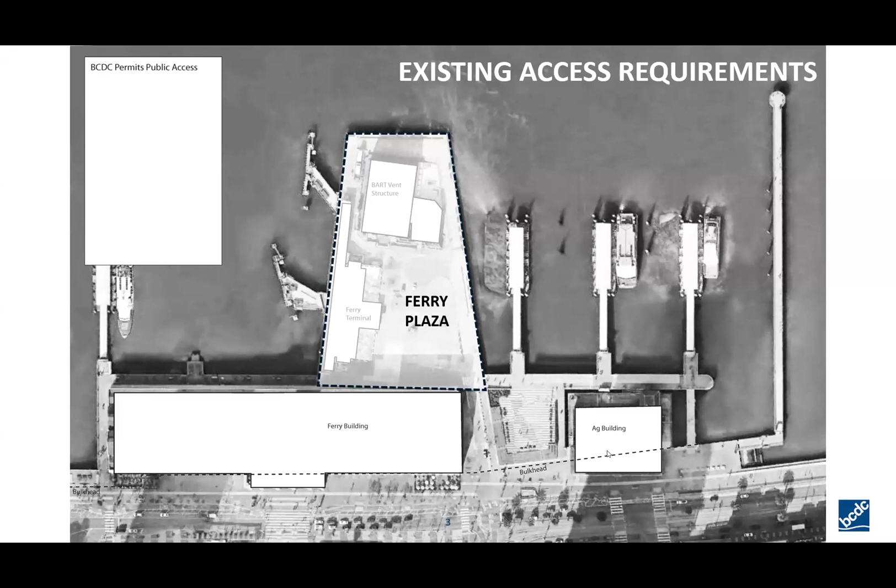The 1967 permit required public access on the perimeter of the platform, not required for ferry operations. The area wasn't specified in a permit exhibit, but was described in the text of the permit special conditions as the perimeter of portions of the platforms that are not required for ferry port operating purposes and that do not interfere with berthing ceremonial ships, that in no case shall be less than 35 feet in width from the edge of the platform. So this depiction is based on that description.

Permit 1973-010 authorized both the restaurant and the Golden Gate Ferry Terminal. The permit required the entire plaza east of the easterly wall of the Ferry Building, as extended south across the BART platform, except for those areas occupied by the ferry terminal or required for access to the restaurant, to be used exclusively for public access. It also required the second floor public lookout at the ferry terminal as public access.

The requirement for the Ferry Plaza was later transferred to the 2000 Ferry Building Rehabilitation Permit. So you'll see that cutout shape here.

Permit 1990-008 was for a number of roadway improvements along the Embarcadero and for the Muni Metro. It required the dedication of public access area for the Embarcadero Promenade between Broadway and Harrison Street. Amendment 6, approved in 2007, authorized the use of a portion of the dedicated public access area for outdoor dining. These include the 30-foot wide areas shown on either side of the building's entry portico, which have come to be called the cafe or market zones.

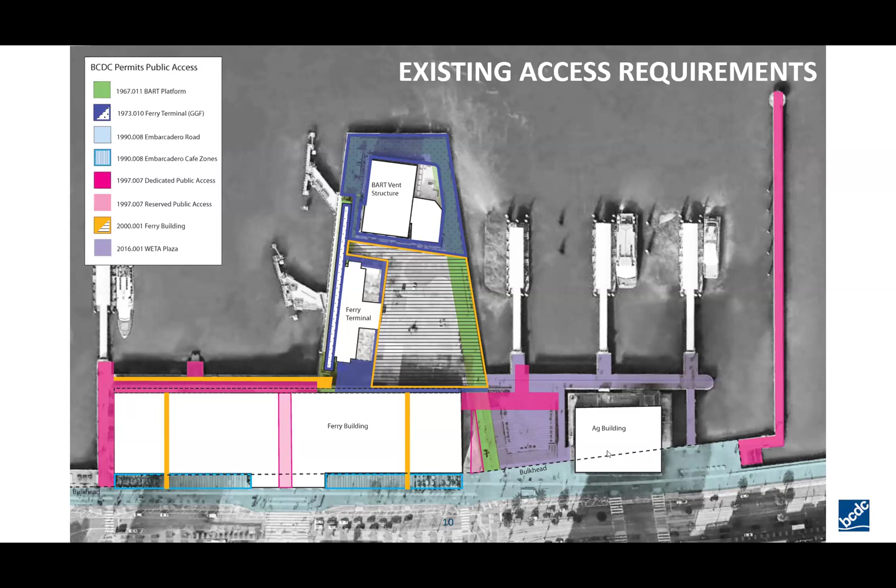Permit 2016-001 authorized new gates for the WETA San Francisco Bay Ferry south of the Ferry Plaza and included public access conditions for the WETA Plaza, also called the Embarcadero Plaza, and a bayside promenade connecting the new ferry gates. These areas are outside of the scope of the current project, but we're including this information so that you're aware of these closely connected uses immediately adjoining the project site.

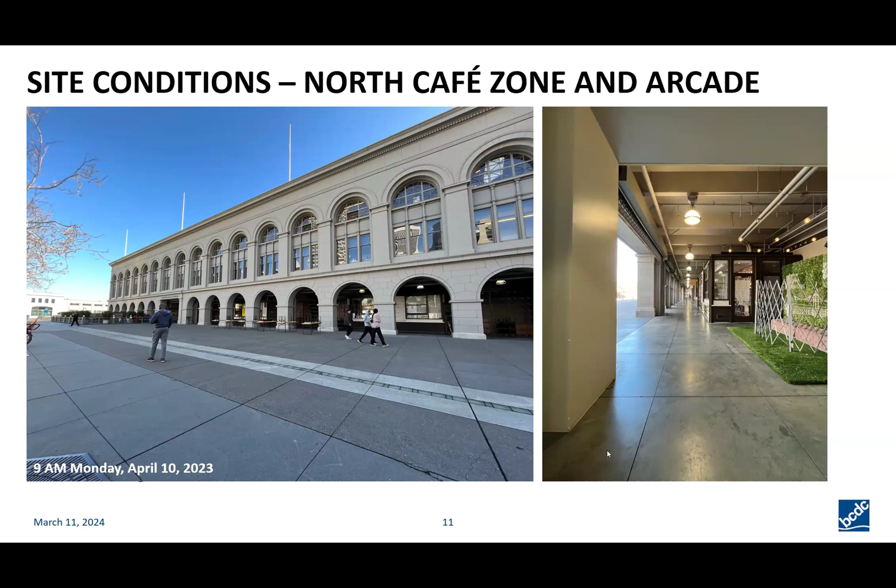And here's some views of the Ferry Plaza. This one on the top right is a view from the Gandhi statue facing towards the south side of the building. Just under that is a view of the space on the north side of the plaza next to the Golden Gate Ferry Terminal, facing east toward the restaurant structure.

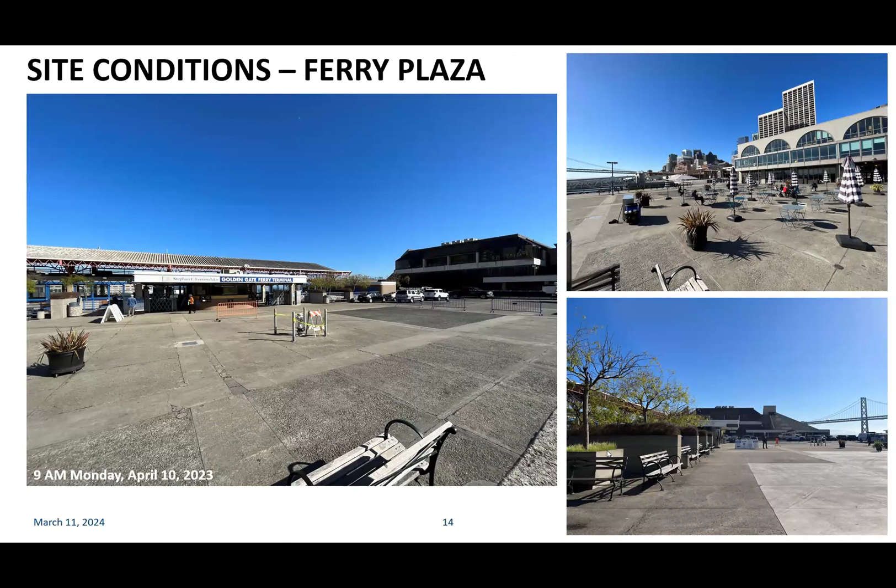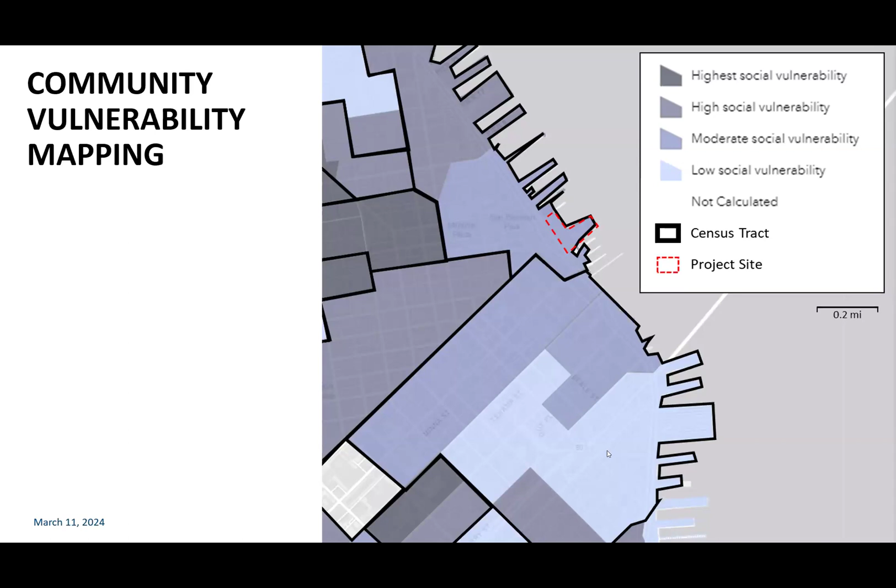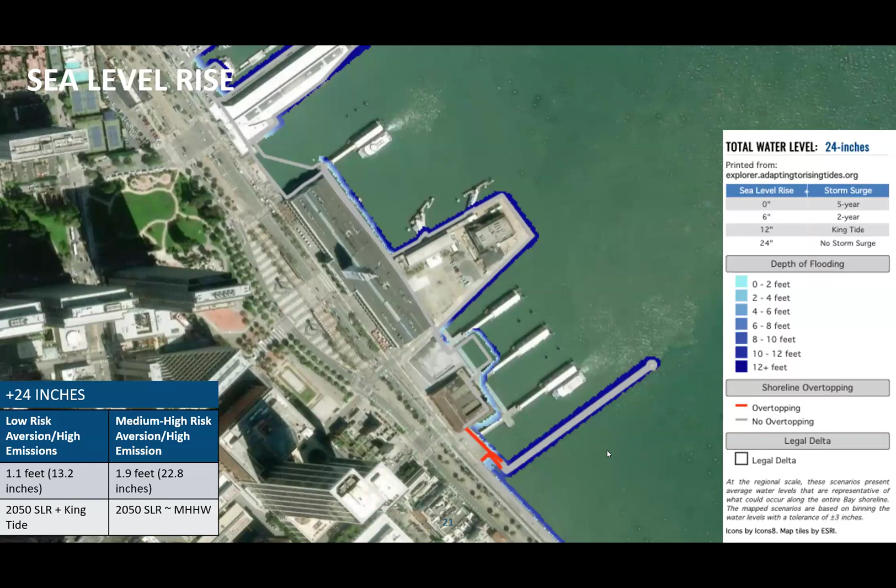And then regarding potential sea level rise, using current site elevations, this map shows what 24 inches of sea level rise would look like if the site remained unchanged. Using the Ocean Protection Council's 2018 sea level rise guidance, 24 inches of sea level rise is equivalent to the mean higher high water level under the medium to high risk aversion, high emission scenario at mid-century. So at this level, there's potential for flooding during a 100-year storm event.

Just a reminder, following this agenda item, the port will be providing a briefing on the San Francisco Waterfront Coastal Flood Study, which should provide some more context on the port's area-wide adaptation efforts.

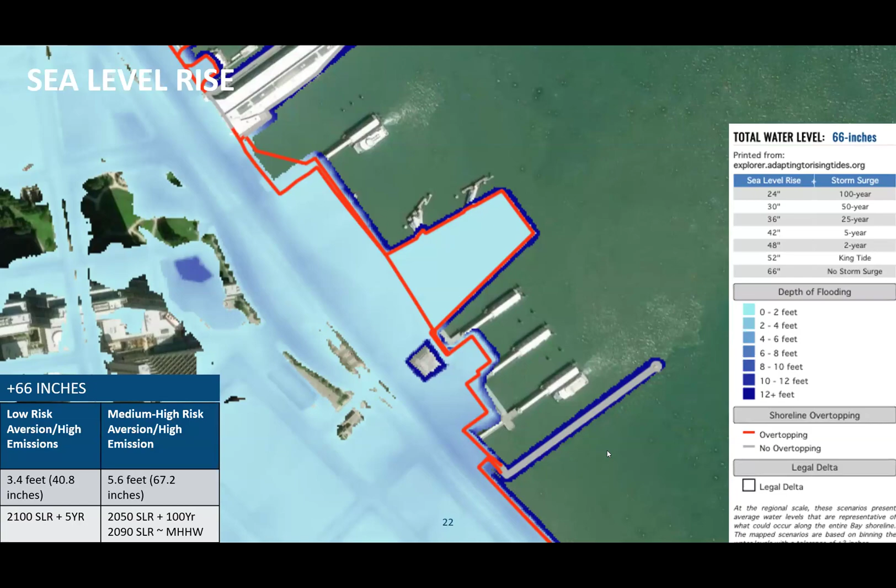All right, and then here's just a quick refresher on some of the major topics of discussion from the previous review on April 10th of last year. Note that the project description has changed since then, most notably in the removal of the Bayfront Kitchens alterations to the east side of the building and the Ferry Plaza kiosk from the proposal.

In their review, the boards were concerned that public spaces and amenities would be removed, but that the demand for them might not be accommodated in the new design. And we're interested in seeing metrics for amenities such as seating in order to compare existing and proposed conditions.

It was noted that the ferry building and surrounding public access areas are an equalizing space for tourists and local residents alike, and they were concerned that the public nature of the site would be reduced.

The boards discussed how the gravitas of civic architecture contributes to the public character of the building and plaza, and how more substantial materials could ground the public areas of the site, while more playful, lighter materials could help define the private commercial areas. The boards also discussed improving the continuity of materials and design between the proposed project and neighboring civic sites such as the WETA Plaza.

Members noted the importance of the transportation program that the plaza supports, and that the space plays a significant role in making connections to all modes of transit. Members expressed concerns that with the transition from public transportation hub to more private uses, they also suggested considering the pathways that draw people to the plaza and different destinations of the site, and finding a balance in wayfinding between using the building as a landmark, using design elements and draws, and appropriate signage.

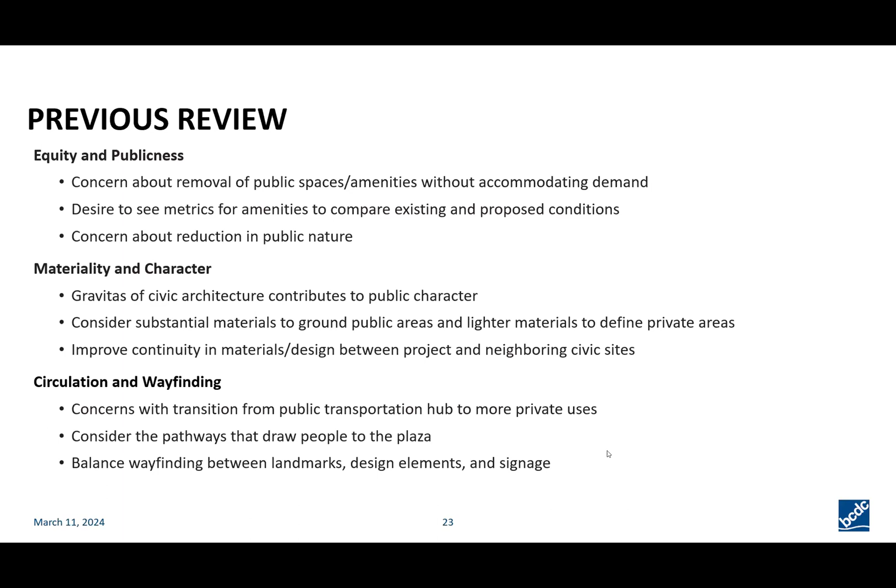All right, before we pass this over to the port staff, I'd like to quickly summarize the questions in the staff report that we'd like the board to consider in your review. So first, please consider how this project meets the public access objectives provided in BCDC's public access design guidelines.

Staff has also identified some specific questions we'd like to ask the board about the design at this stage. These are: 1, do the proposed alterations reflect the civic nature of the ferry building and potential demands for public uses of the site? Is the civic nature of the building and surrounding public spaces supported by the materiality and design of the proposed project? 2, do the proposed alterations sufficiently maintain or enhance circulation and connectivity to and along the shoreline?

3, do the proposed activation areas along the building frontages, collectively and individually, promote an inviting and usable public access environment at the ferry building and allow for adequate public circulation to site entrances and destinations? 4, in particular, would the proposal to place a cafe, market zone, and public seating area in the South Promenade activate and improve the quality of the public access experience, in balance with addressing the public access and circulation needs of the project area? And then 5, do the proposed elements support a cohesive, legible, and inviting public access program?

So first, I want to check to see if the board has any clarifying questions for me on anything presented in this introduction.

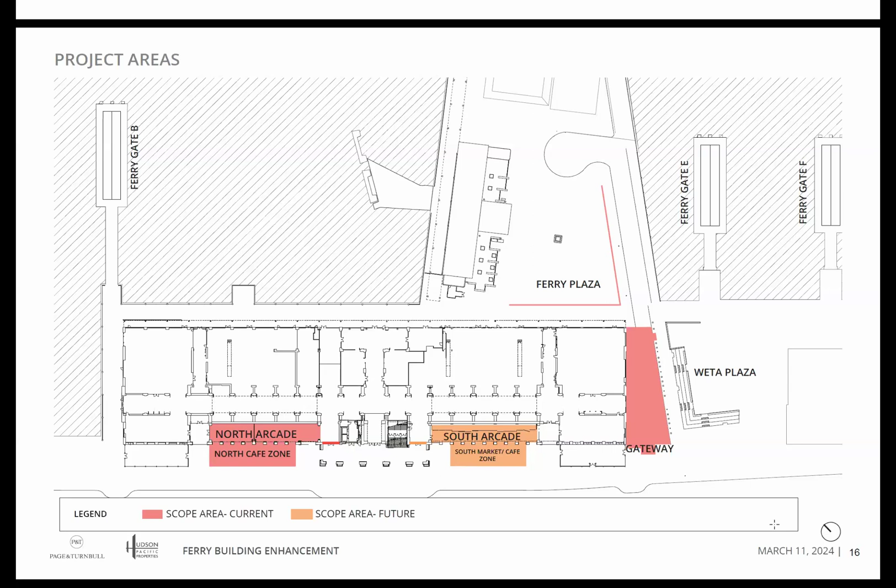Here you can see a quick preview of what we're looking at in the front arcades. This is the North Arcade. We've got merchants—and to be clear, many of our merchants are both restaurants and food purveyors for takeaway and prepared foods—fully occupying those front arcades and spilling out open onto the cafe zone.

It's important to note, as you can see in the rendering, that in 2003 roll-down grill gates were put in as part of that project. We went back to that same location and looked at how those are installed behind and separate from the building arcade, and looked at how we can create a movable glass panel system that would be open during the regular daytime when the building is functioning well, and closed when it's cold, windy, or into the nighttime. Today, those roll-down arcades you saw earlier still don't do much about wind or temperature into the evening, and that's an important thing to notice.

The cafe zone is lively, projecting life onto the Embarcadero frontage, including dining zones, seating, and public seating along the front. Over towards the portico, there's also public non-dedicated seating added there, in addition to the canopy.

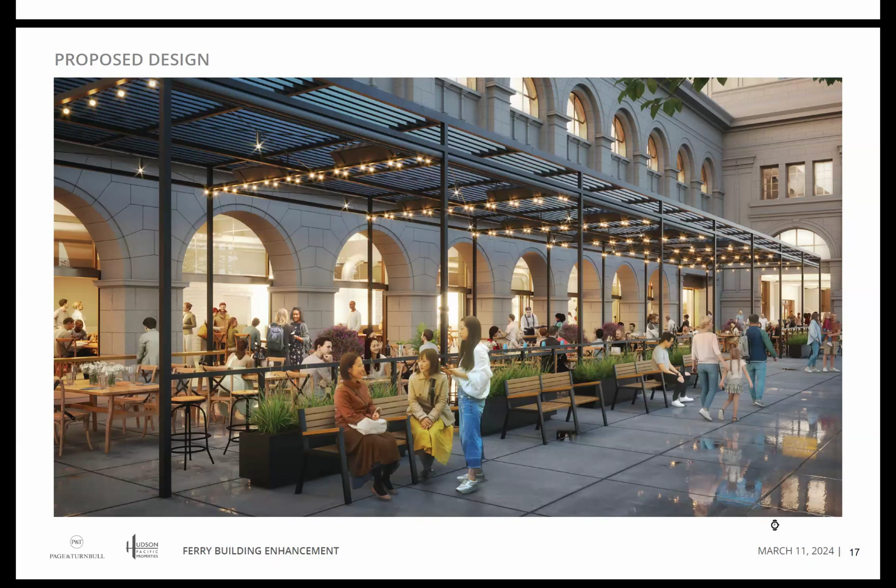We think the wedge—or the gateway, as we're starting to call it more publicly—is a huge opportunity. We now have a great neighbor in the WETA Plaza, and the building itself, with the restoration complete, is looking beautiful. But in between, as you'll see, there's a real question of what to have. This will give us a chance to better frame the existing driveway, with a cornerstone that mimics the WETA Plaza and a marquee sign announcing the Ferry Plaza, along with individual gates and directions for those gates down below. We think this can be a really special place. We're also going to introduce a new cafe zone towards the rear left portion, and a new public seating area that will benefit from the warmth of being on the southern side of the building.

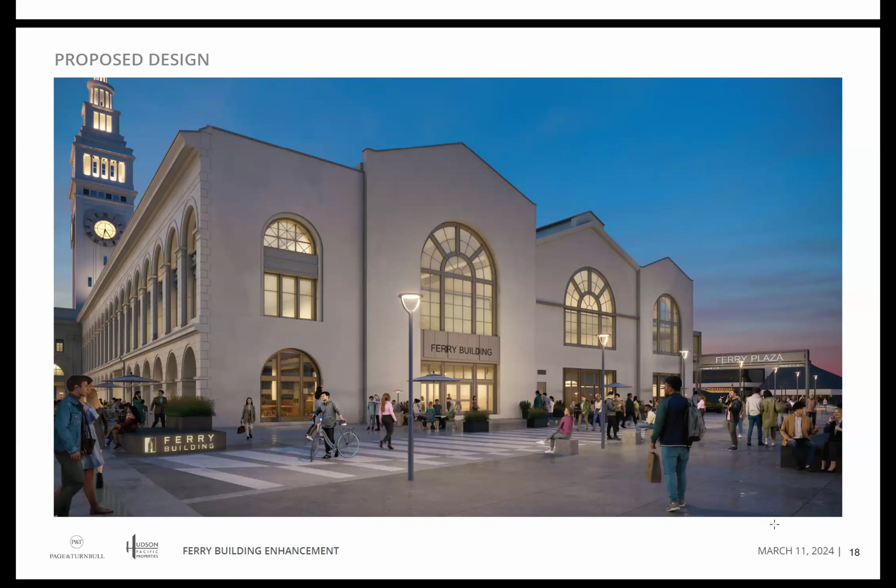Finally, and this is really quite simple, we need great lighting out on the plaza. The only change here is having a series of lights, which we'll talk more about, that make this a place everyone would like to spend time in well into the evening.

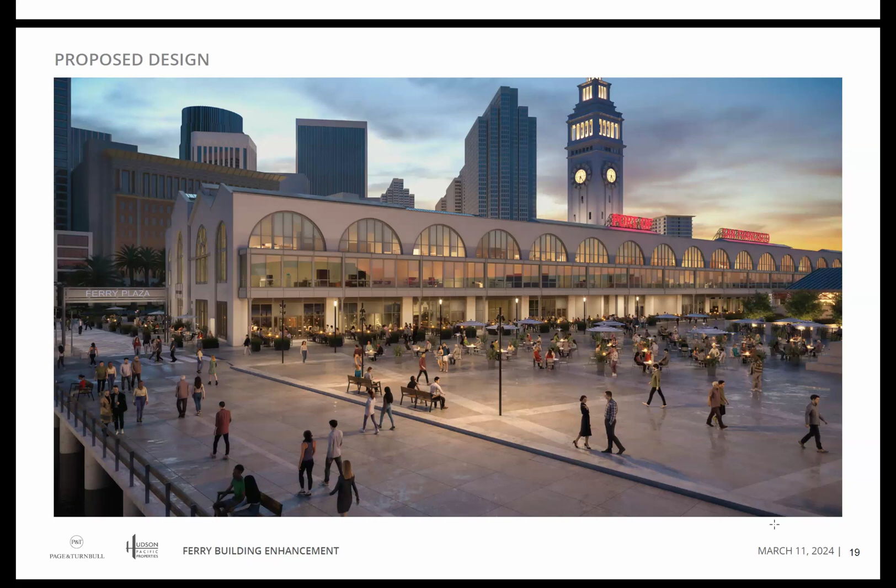Thank you very much, Carl, for a great overview of the project. I'm Lada Kocharovsky, an architect and principal with Page & Turnbull. I was part of the preservation design team in 2003 when the renovation of this building brought it to become the new destination in the city. I'm also part of the same firm that wrote the design guidelines in 1978 that defined the approach to rehabilitation and adaptive reuse of the ferry building. I can assure you that in the proposed design, there's nothing we see that contradicts these design guidelines.

As architects, our goal is to meet the client's needs, and we're faced with a million questions and problems. As preservation architects, what's paramount to us is making sure that given the magnitude of significance this building has within the context of San Francisco and nationwide, we bring design interventions that are compatible and sympathetic to the fabric of the existing building. So as Carl outlined the arcade proposal and the cafe zone, our focus is to bring warmth, light, and consistency of design along the west facade by integrating new restaurant uses that will occupy the arcade. But the character of the building is not changing at all.

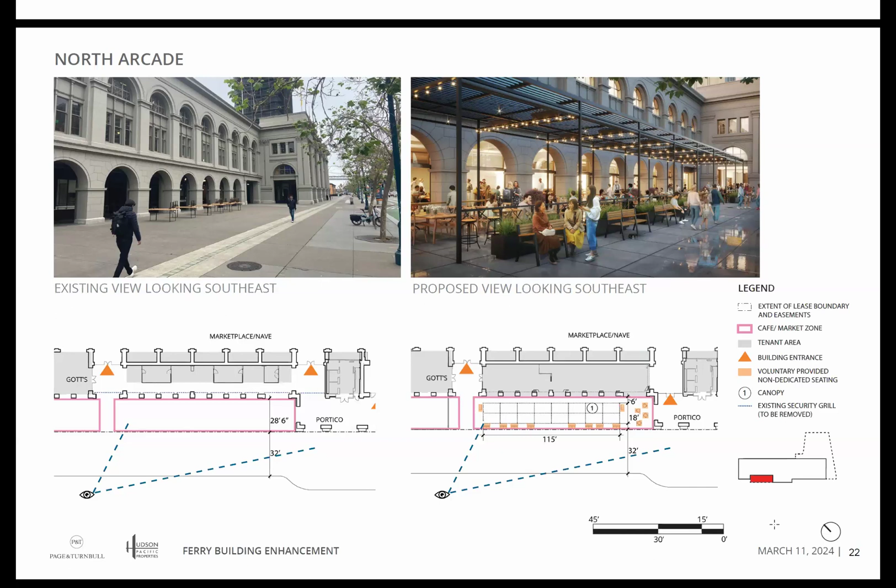The outdoor area with the canopies frames the space for outdoor seating while remaining completely flexible. We have an exhibit here to help orient you. These images side by side show the character of the arcade and how it's used by visitors—on the left and right, how we envision it being used with a variety of visitors and public uses. The benches and seating along the edges of the canopies are open to the public and won't prevent anyone from using the building, just as people engage with the pedestrian traffic along the Embarcadero.

This plan, though it may be a little faint, shows how the seating is planned within the canopies that restaurants will use. But on a market day, we envision it being pulled back, since it's completely flexible. The barriers can easily move to the back to allow the area to be used by the farmers market, and these are the tent layouts we contemplated that could easily go there.

So that is how we demonstrate flexibility that comes along with the proposed design. And speaking of design guidelines, the big focus of preservation design guidelines is flexibility and reversibility. What we're proposing with the canopy structures is completely reversible. They're light, they're airy, and they serve to organize the space for outdoor seating and engaging visitors.

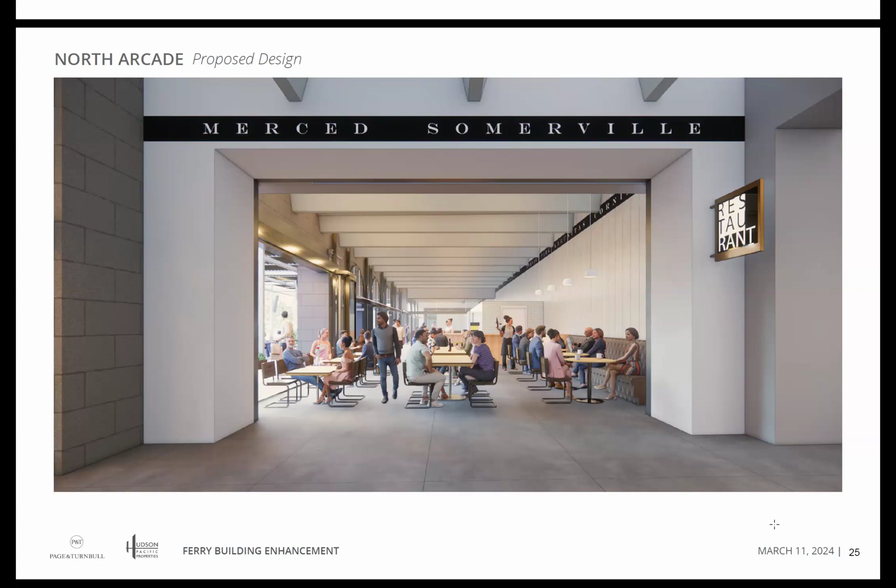Here we're looking at the view of the arcade from the nave, and it shows that the focus of the design is to maintain the transparency of the arcade. There are no barriers that we're planning. So anybody who sees the arcade in the images that Carl shared before, with the view of the length of the arcade, that view will remain unobstructed with future interventions. This is a good example of how you read the arcades now, and this is how you will continue to read them once the project takes place.

We wanted to show a different angle, since there were previous questions about how and where the new glazing systems will be installed. The roll-up gates that you see right now, which we showed in previous slides, mark exactly the location where we're going to install the new glazing systems. Essentially, the interventions that took place in 2003, which were meant to be reversible, are being replaced with a new system that allows visitors to be comfortable inside the building.

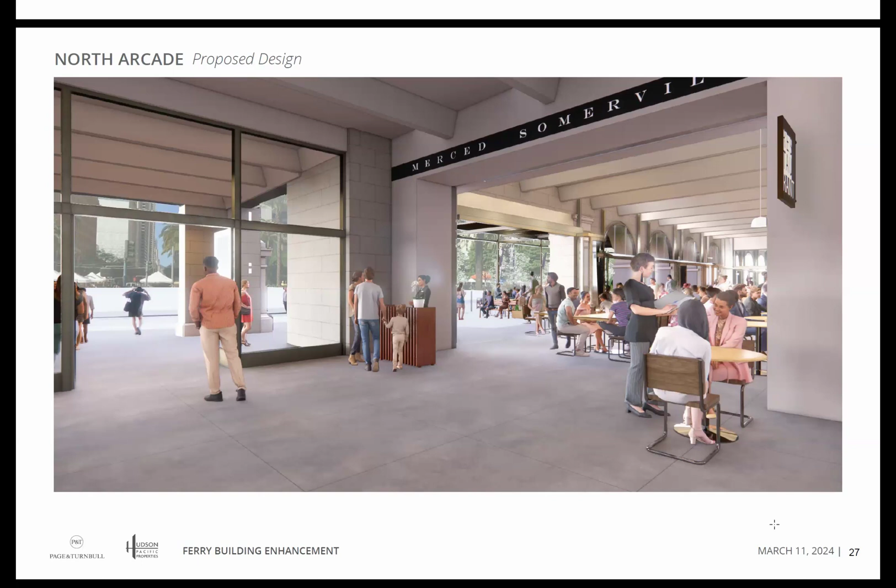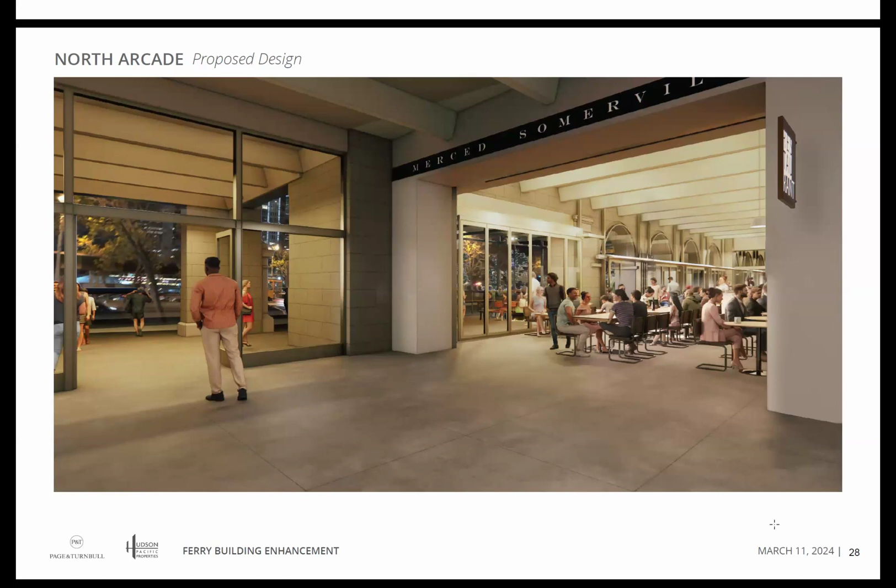And this is the view at night. On days when the weather is not friendly, this is how people are going to be enjoying being inside those spaces. The systems are transparent, and they will look inviting and warm from both the outside and the inside. Side-by-side views here: on the left, daytime, and on the right, nighttime, of the same space.

With that, I would like to ask Sarah Kuehl to speak about the exterior improvements to the plaza.

Thanks so much, it's great to be back and to show you all some response to your design feedback from last time. For the record, my name is Sarah Kuehl, and I have a firm called Einwiller Kuehl Landscape Architecture. When we started working on this project, it's obviously a place of a lot of gravitas and seriousness.

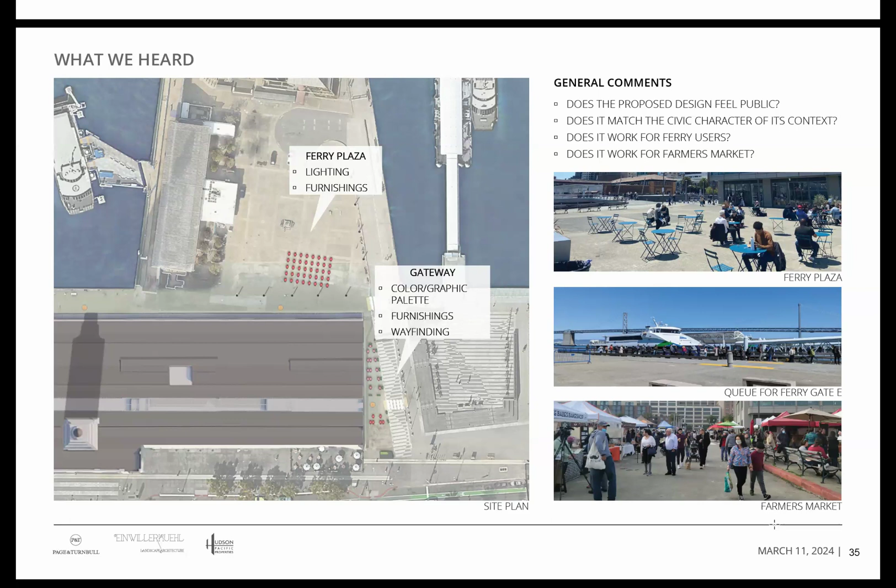Those were terrific comments, and we continued that conversation over the last six months to a year with people who use the space every day, getting into specific things around operations. How does this place really work? There's a built architecture, but there's also a programming and operations side, which we attended to in our thinking.

When you arrive here today, particularly at the south end of the building, it's a bit indeterminate. It's unclear exactly where you're supposed to walk, unclear exactly how to enter, and not totally clear when you get to the Ferry Plaza. Those are some of the things we started to solve with our interventions.

Our interventions are quite a bit scaled back from the last time we were here, and we're really building on what's come before us much more directly. For example, we've added a cornerstone seating element that's almost a piece of a glacier that cleaved off from the Weta Plaza. We've also added the gateway sign and kept that to announce you entering Ferry Plaza.

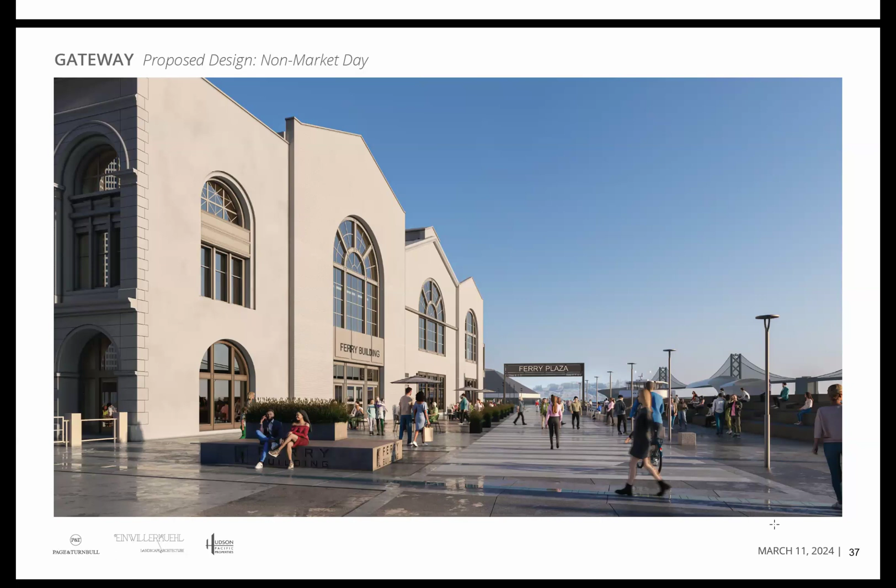We have activation and spill out from the building on the eastern half of the wedge. All of those things together begin to suggest this is really a pedestrian place and give you cues for how to move about, enhanced with some ground markings.

The actual materials we're using really want to feel like they're part of things that are already here. So the Weta Plaza granite, the proportion of the seating, the way we're building that cornerstone is going to relate very directly to the materials used at Weta Plaza. The Ferry Plaza signage takes a lot of cues from a traditional gate to a ferry, but one you'll be able to see clearly from Embarcadero.

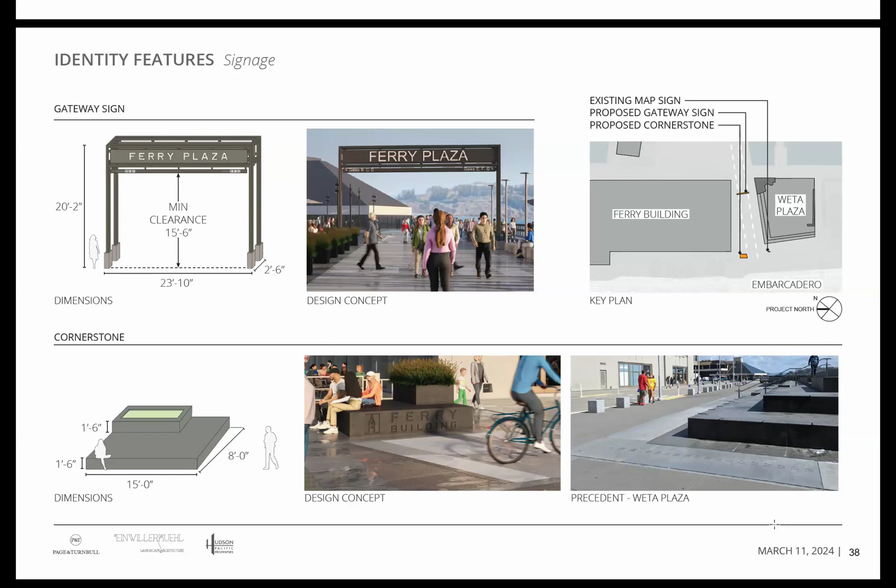When you see those things laid out on the plan, they're working together with elements that are already here. You can see the seating spilling out and those two identity elements. You can also see a mosaic medallion and some ground markings further helping to define the space, but we're being careful not to add fixed elements that get in the way of what FoodWise is doing out here, allowing flexibility for setting up the farmers market.

The idea for the medallions came from two things. One, there's a tradition inside the ferry building of mosaics that relate to the market hall—there's also one on the mezzanine. There's also a sort of wayfinding medallion at a gate to a ferry. We wanted to use these medallions at each entrance to the ferry building to cue that this was a place of public entry.

So as you move between outdoor seating and other things, this tells you you're really supposed to enter here. It seemed like an opportunity to tell a story about the waterfront, either animals that are part of our waterfront or perhaps boats, and we would work with an artist on the final design of the medallions.

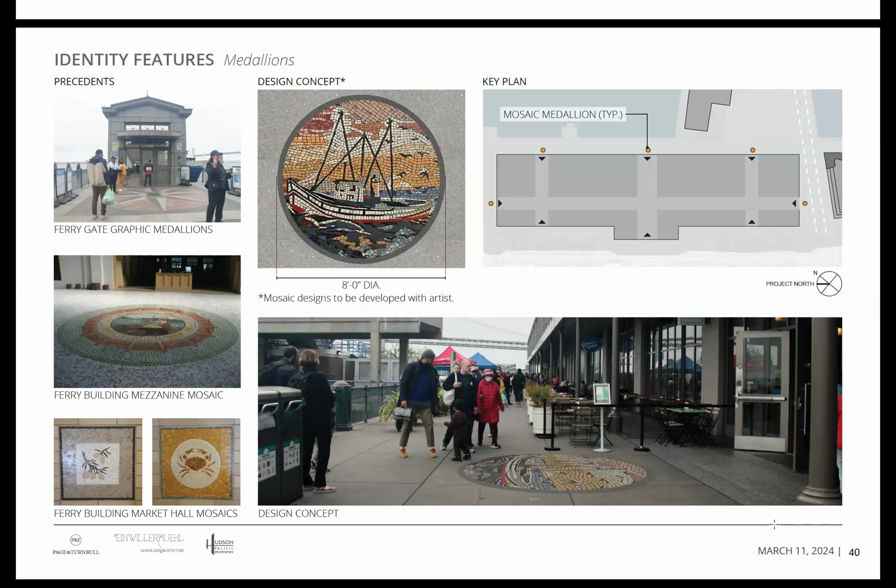Our design proposal is very small. We have a series of lights that mark the edge, kind of the way lights can mark the edge of a roadway to clarify circulation, and additional seating being added just to expand the use in that area during lunchtimes.

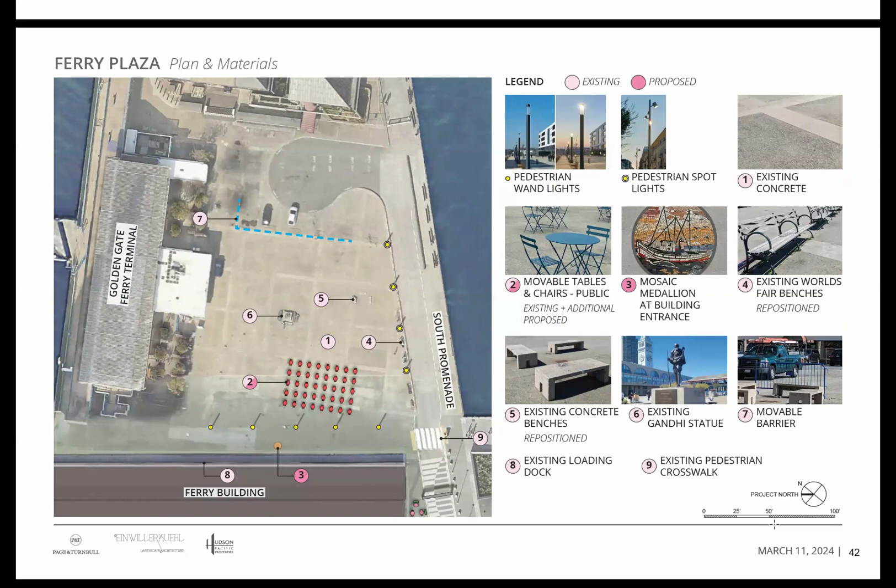So I'm available to answer questions, and with that, I'll hand it back to Carl.

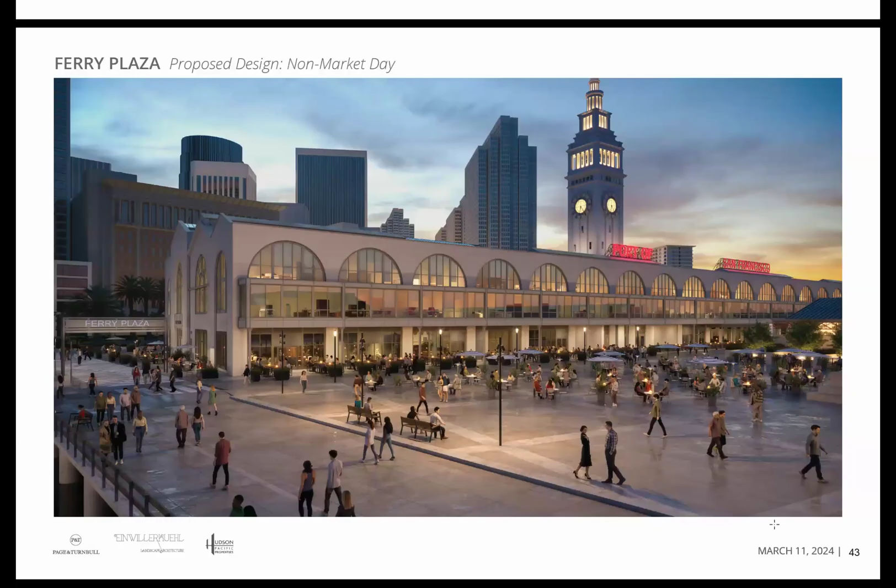So my question is, when you move the railings to make room for the tents, in the render they look like they're part of the architecture, which is good. But at the same time you need something flexible—what is that really going to be? And in terms of serving alcohol, does that height of barrier work, or might something taller appear?

Just a clarification on the seating: the area is open from 6 a.m. to 10 p.m., same as the ferry building. The movable exterior seating gets packed up every night—unless there are events, we have porters who move that seating in and out and stack it as necessary. The new additional exterior seating that's movable would have that same management. Okay, thank you.

Could someone explain how the arcades were used in the original ferry building design, how people used them? It seems like that's not necessarily what they're being used for now. Can you also explain what the proposed use is, and how it compares to the current or previous use?

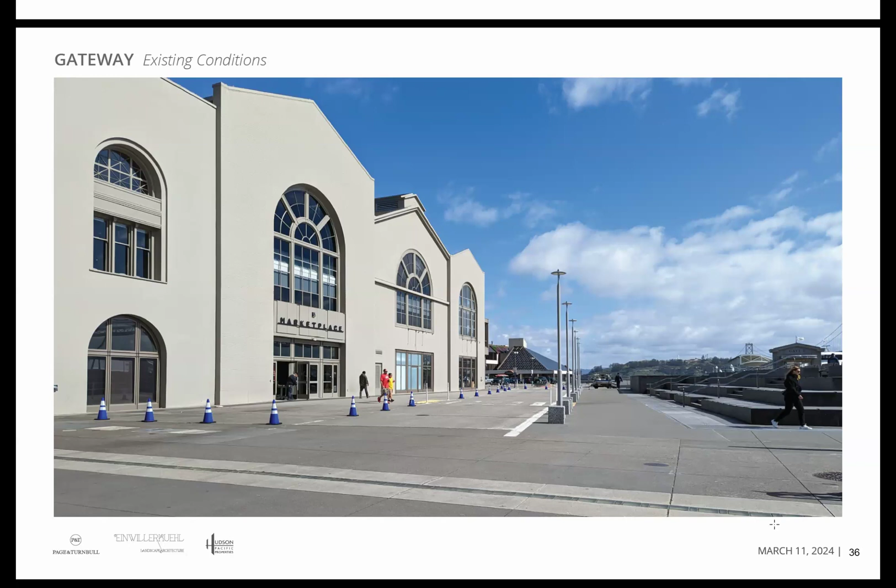My last question, and there may be others as I continue listening to other people: I do not see any back of house space indicated in your plans. You're speaking about transparency and lightness, a light touch, etc. But refrigeration, food storage, and back of house activities have to occur somewhere. Would you need to take space from the building's inside-facing stores in order to accommodate that?

I anticipate we've gotten this question before. To be clear, I think any chef would love much more space and more back of house, and space in the Ferry Building is dear. So part of it is working with a restaurateur who can fit into these concepts designed by Studio KDA, and sometimes that means a more limited menu—someone very specific. That said, it also means this will probably work better for a newer, entrepreneurial tenant who has the opportunity to focus on four great things rather than a long menu.

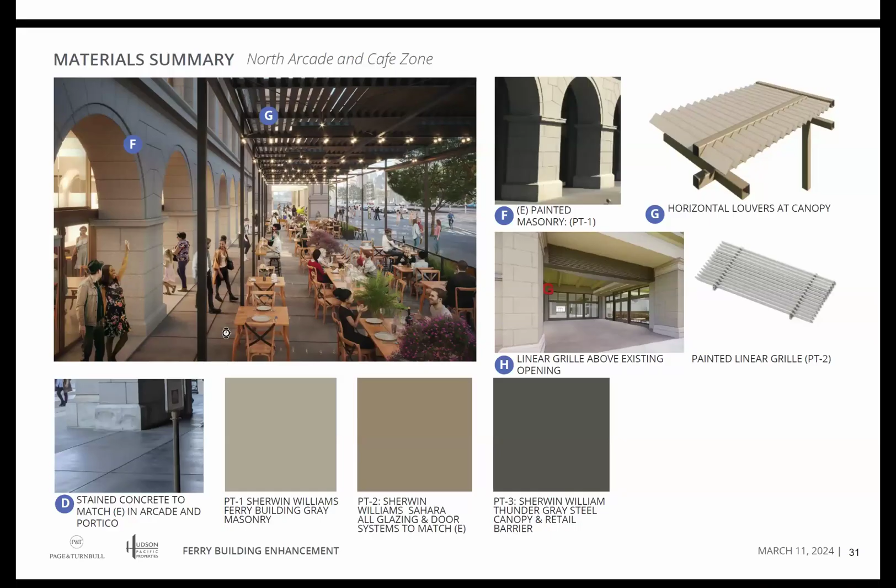Yes, so the layout of the Saturday market has been coordinated with Foodwise. There are some occasions where you can have double depth for your tent spaces, so vendors that need a bit more space to operate will be able to have that space. The first thing we did when we last left you was sit with the Foodwise team to come up with something that worked.

And just for everybody else's edification, we've looked at a variety of ways to try to provide heat and light to this space. Most of those ways were more impactful to Foodwise than what we're presenting today.

As it relates to the glass line and circulation, the way this is designed conceptually is to have those glass walls fold behind the column so that they're not perceived from the public. So you do get that airiness that I think we all want to protect and see. That is the hope and intent of the design as this concept continues to evolve.

But there's going to be a rail at the top that allows it to accordion behind that column line. It won't sit proud of that column at all—it'll be inset into the arcades. So it does provide that opportunity for light, airiness, and some circulation.

To be honest with you, based on your question about that circulation area inside the space to give that appearance, a lot of the table layout will happen as we identify a tenant and how many seats they want and how it's going to work for them. What we're showing you today is a sample layout. I would imagine that just from a service standpoint, they're going to want a bit more space to operate between those two points, so I do think you're going to get a bit of walkway on the interior space that you're not perceiving today.

And it'll be subject to fire code as well. So I think we're committing very clearly to the opening in between the two spaces that you can see right here, and that will line up to exiting and all sorts of rules.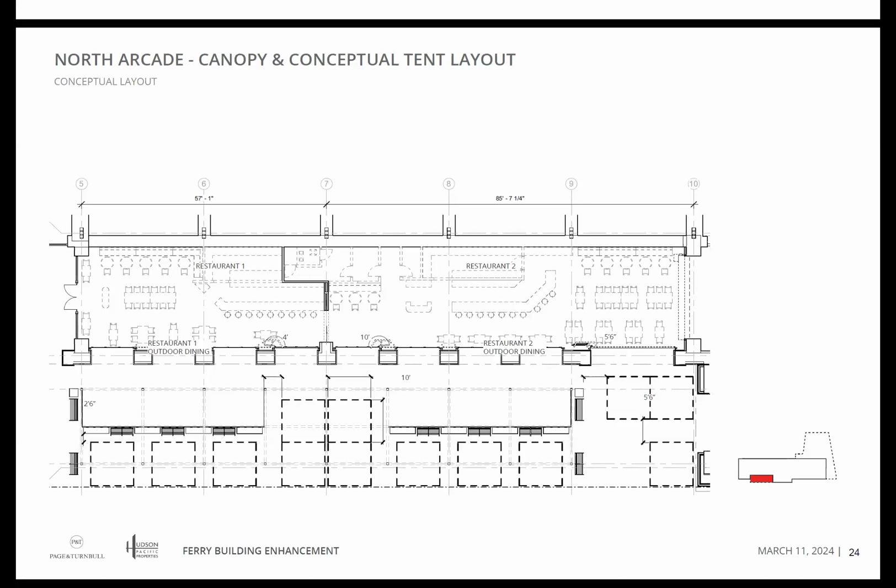So this is Ashley from BCDC. We did receive a number of public comment letters regarding the ferry building item, so I'll summarize those. We received these letters prior to 10 a.m. this morning, and they have been forwarded to the design review board.

And the Telegraph Hill Dwellers expressed concern over the proposed project. The letter summarized the restoration design guidelines and identified the impairments of thousands of square feet of public access through privatization, material impacts to the historic architecture, inconsistency with public access policies, and the transformation of the ferry building from public marketplace into a restaurant entertainment destination as their points of concern.

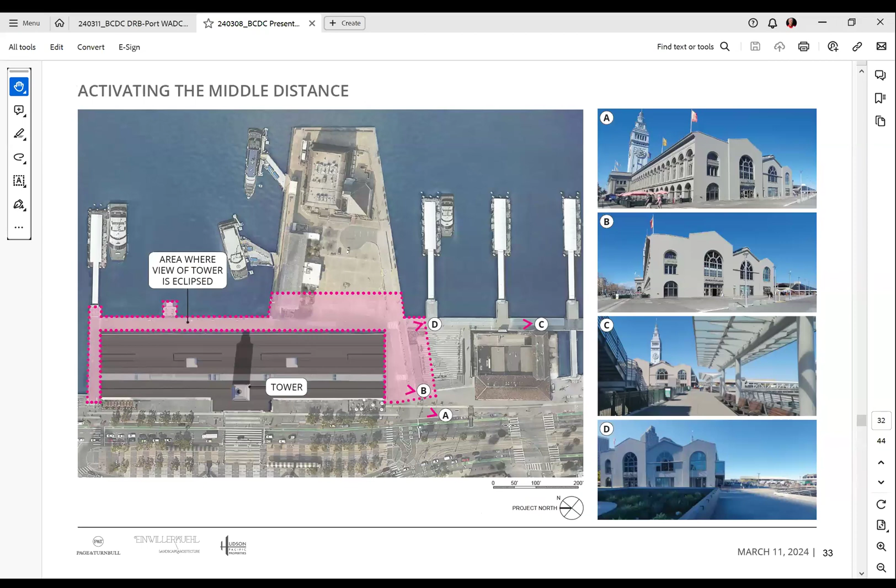I'll be quick. Yeah, it's a beautiful building. I feel a little out of my depth here as an engineer and not a designer in the sense that we're talking about here. I'm concerned about the conflict between some comments about wanting to keep the arcades open space, to maintain public open space, and the desire to activate the space and change the use. I've been thinking, and I can't think of a way to mediate that. I think other board members had great comments on how to do that, so I'll just give my time to the other board members.

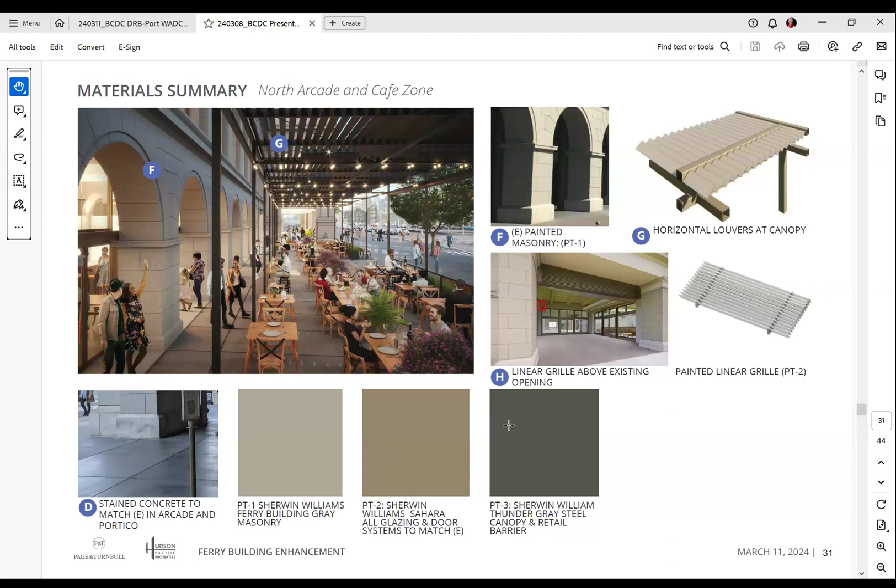Okay, thank you. Well, for me, I'm not going to build on what the other board members have said. I agree with everything that people have said. And I think the critical question I want to address is the question of the publicness of public space and the evolution of public access over time.

And I think for those of us who have worked on improving or creating public space over the years, you do see a constant evolution of how public space is used. What may be very effective for 5 or 10 years may become redundant, and then something else might become more effective, more appealing to people. So while I know at BCDC we have to have permits and we establish precise square footages...

I think when it comes to the public space around this building, the precision of how many square feet represents a compromise that cannot be walked back from, versus a compromise that might actually enhance the overall public sense of quality of public space because of other things being added, or other attractions or destinations, can, in my mind, be a reasonable justification for compromising a little on these square footages.

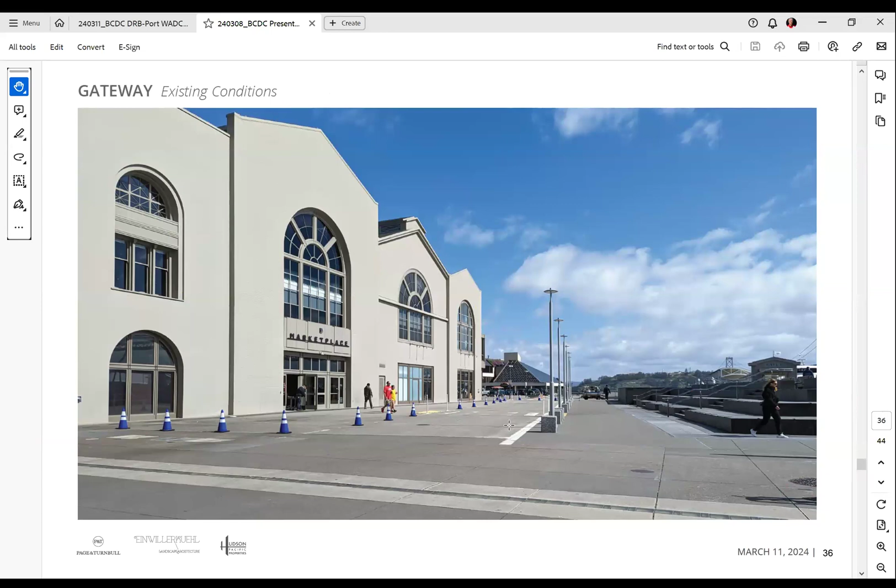What starts to really concern me is that the changes needed to the ground plane three times a week create an element of too much activity and haste that takes away from perceiving a strong public space as really being there. There are constant changes, and I like the dynamic happening on the South Plaza and in the Wedge and beyond. But as it addresses the front of the building, I am concerned about that.

Those would be my comments. I think many of you have said many of the things I probably would have said. I was just going to suggest, I don't know how this works, but we have three different spaces we're looking into and evaluating: the wedge, the plaza, and the front of the building. So in those three terms, I think the proposals for the plaza seem pretty reasonable to me in terms of focusing on light.

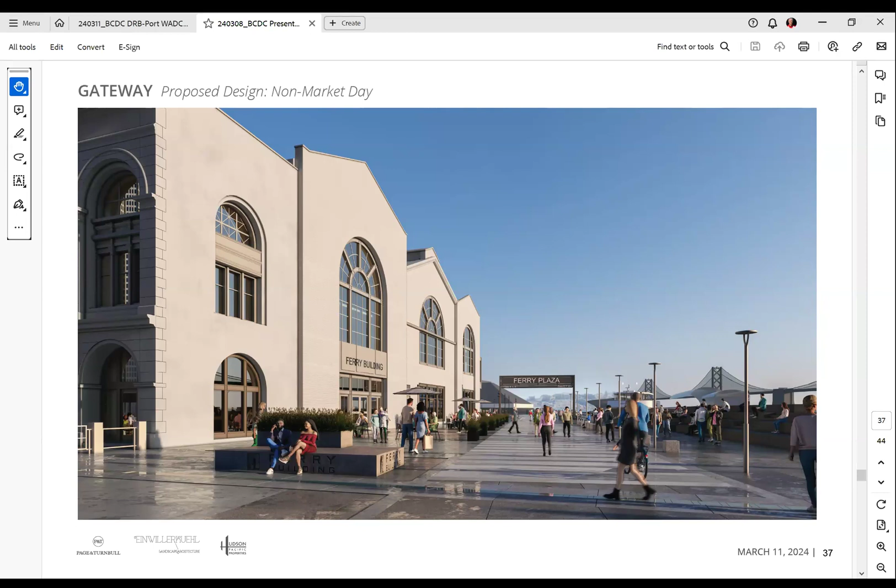The Ferry Plaza sign—the only question I had was whether that would also include the function of providing separation for traffic, because right now you have this temporary barrier that doesn't necessarily look that great anyway. So going back to the point, what currently is happening could be improved by having that arc be functional for that separation, or else that separation is no longer necessary.

In which case, I honestly prefer to have a design element that incorporates all the functions that the ferry plaza will require, one that feels much more welcoming and clear, given that it will go through careful, integrated design so it feels friendly to pedestrians while barring cars when needed. From that perspective, I think that's fantastic.

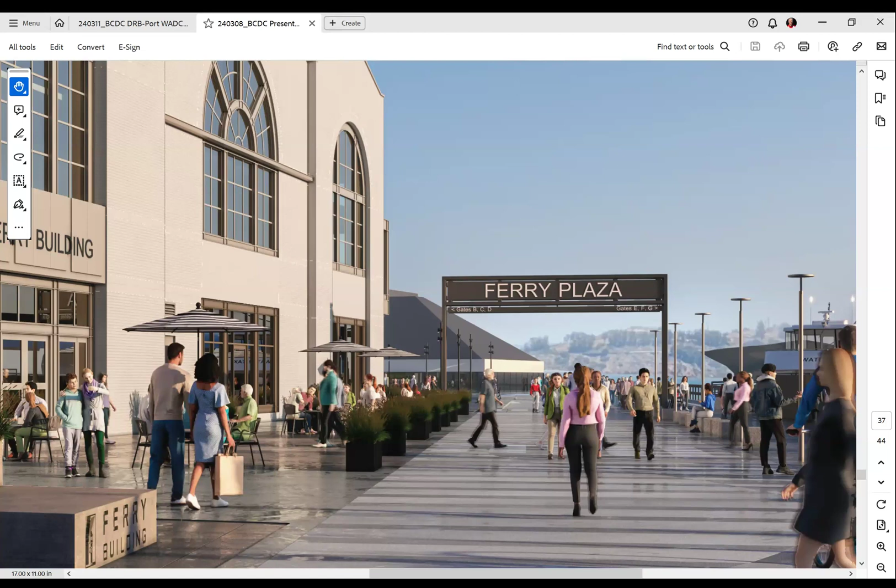This whole area on the wedge and the reactivation, I couldn't agree more. That space, on market day, feels like the most amazing place. Most of the time I've been there, it feels like an empty market space, which is the whole point of these new improvements that I think will change that perception.

I'm pretty much in favor of all of these, and even to Patricia's comment about whether it has to come out or not, I don't think people need that in essence. Once you begin to see it activated, you'll understand this is an inviting place as opposed to the back of house, which is my perception currently today.

That brings us to what I'm perceiving as the more controversial part of the conversation. I would probably lean toward saying we do need to support our vendors, our restaurants, our bars—everything in the city today is becoming more paramount—so we go a little above and beyond to reactivate all the areas we enjoy.

To me, the biggest conundrum has always been why the ferry building has such a limited schedule. It's because we don't know that it's open late. So whatever needs to happen to activate that, I'm very much in favor of.

I am not a retail or commercial expert, but I do know that all of those activations in reality are a bit of a gamble. You have to test something, put it out there, see how it works, then evaluate and revisit.

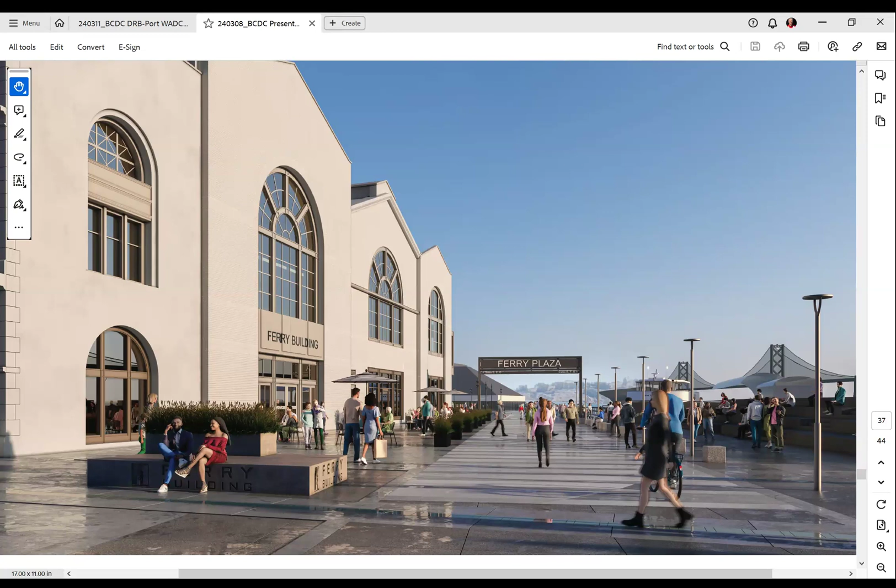Currently, the activation or publicness of that space, as a user of the city and not a designer, feels somewhat like 'am I supposed to be here?' Or is this the back of house—like how the Slanted Door used to have that 'out the door' thing, this little indication that there's a Blue Bottle inside, which indeed there is. So there's this whole perception of what happens on that arcade as a secondary function.

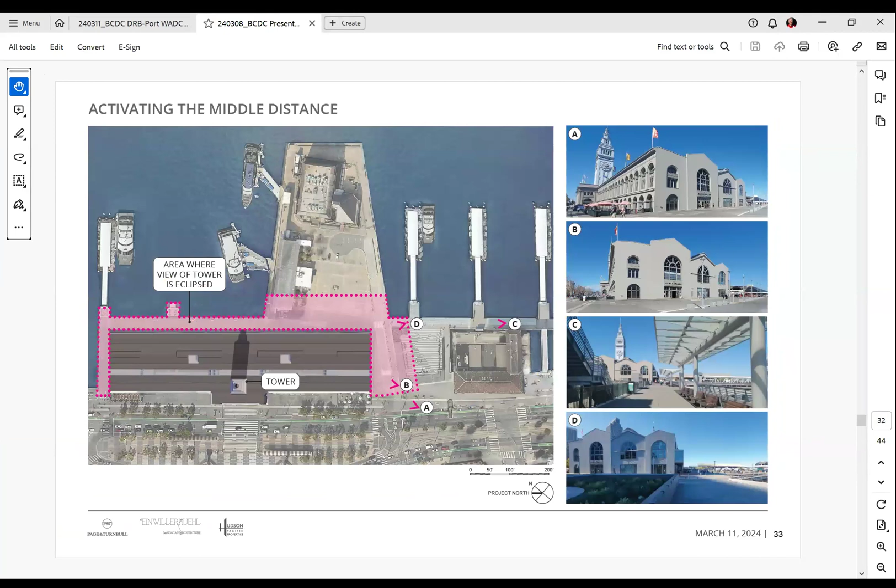I think this proposal is the current risk, the current gamble, to try to figure out. I do think there are many things at the minute level of design, whether that perception of six foot or of the grandness of that movement is perceived correctly or not.

And it's not about the six foot dimension. It's about—I think Patricia was bringing that up—making it work, not necessarily fighting over feet and inches. That's what I was bringing up: can we think of this parallel axis that feels pretty open? Because right now, my perception, in terms of what Goth—is that the right pronunciation?

Goth, sorry, no H in there, Goth. That is definitely pretty inaccessible unless I go buy a burger from them, which I haven't—it's really great. But if the idea I'm seeing here for this proposal is not quite like that, it's perceived as something you can come through, go through, pass through, and I think that's the big difference I see. So from that regard, the light, the glass, all of those things I think are fantastic.

I do wonder about the benches proposed to be in front to delineate that—I think they were introduced as a public benefit. And I wonder if that's necessary in this context of keeping this perceived as much more flexible than what Marketplace and Gotts is doing, because those two spaces don't feel as public, let's say, as the other.

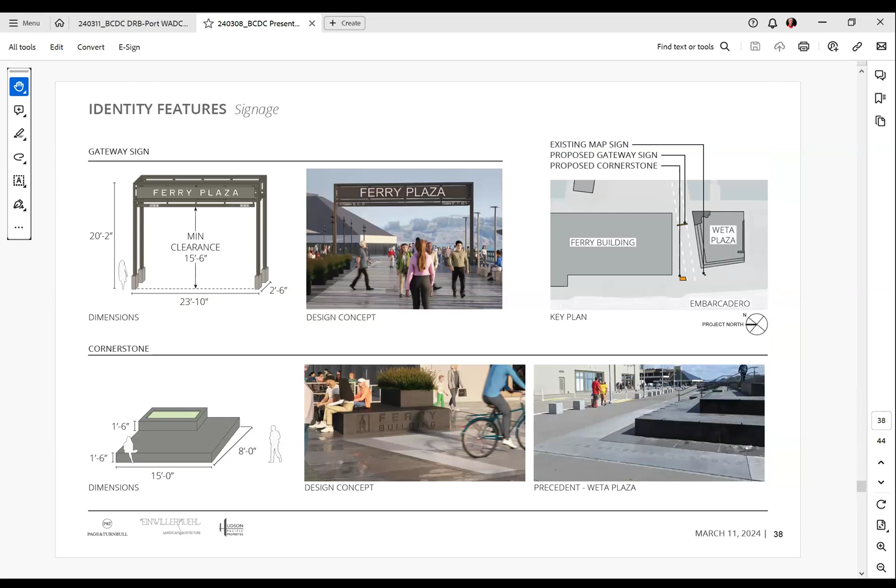So I think that's important. As far as the south treatment, yeah, I agree with the idea that it's not well-used space. I used to come here a lot to the Ferry building during lunch and on weekends, and these spaces were never places I would want to be. My dog would not even want to walk under them. So I think we really need to think seriously about how valuable some of this public space is if it's not being used, and we have an opportunity here to make them more publicly used. I think I would want to keep that in mind.

I think the other thing I would add, and this might be controversial too, is that the canopies don't offend me. I think if they're done right and finely detailed, they can actually accentuate the historic architecture. There are really great examples throughout the world, in this country, Asia, Europe, where the integration of a modern structure or support system into historic architecture, when I see them, I think it's beautiful. I think they actually accentuate the historic architecture in many ways.

This one's a little hard to read because you see this sort of powerful line across the canopy on the south face, and I'm trying to figure out if I were standing across Embarcadero, would I really perceive this canopy, which at least in the renderings appears very porous. If anything, looking at the renderings, I can still make out the historic facade of the building. So without that kind of rendering, who's to say whether that's really dominant or not? Again, if it's done well, it could help light up the elevation of the building. I think there are no more comments.

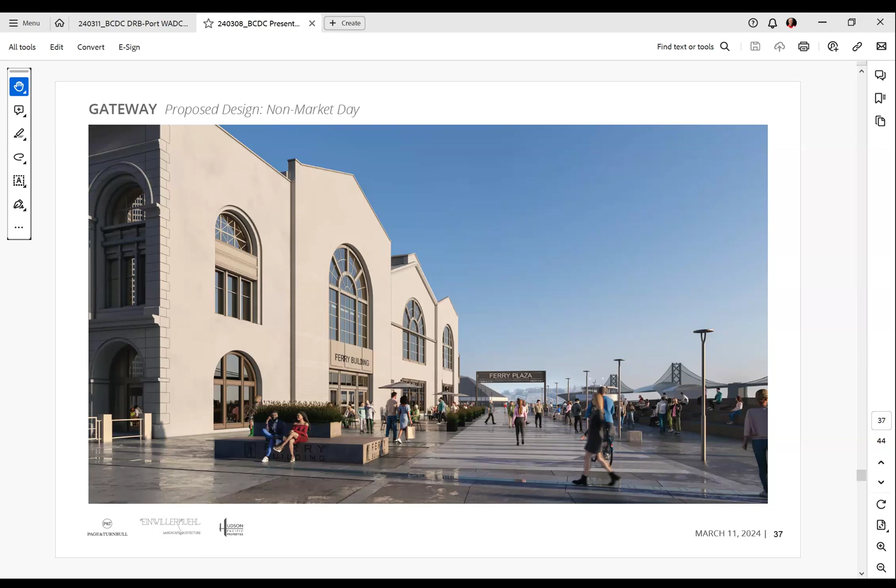On the arcades and the northern side, I agree. I have concerns about the southern being something we have no real notion of what the details are, so I'm not really comfortable that it just gets rolled in. For the northern, and overall, I really appreciate the thoughtfulness and restraint in coming back, and I think this presentation was really well organized. I hear the nighttime goals, which I think is really important.

So to me, the canopy is about lighting and heat, actually maybe more than shade. Can we achieve that? I've come to kind of agree on the arcade, the possibilities of arcade enclosure.

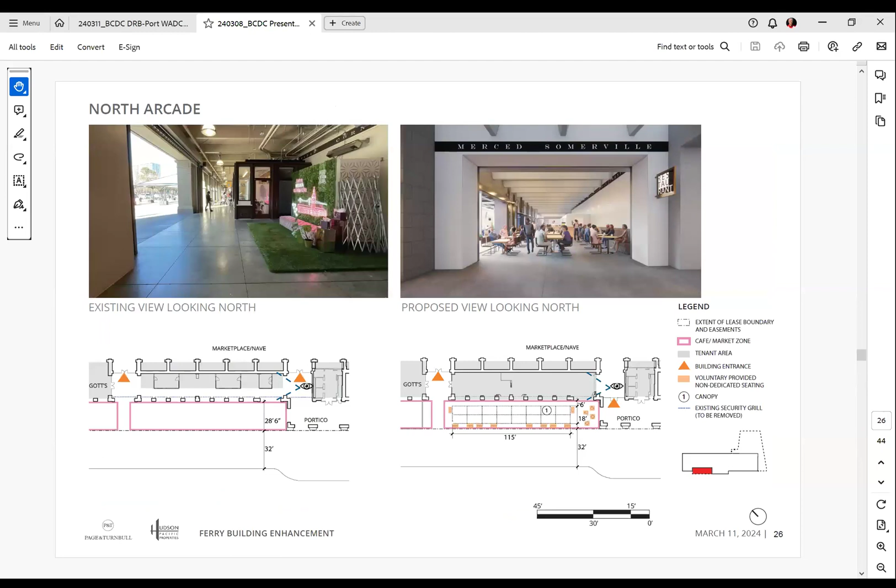I think some of the things I take issue with are the things that feel like gestures to maintain publicness, but they're not. Even the passage between the two restaurant spaces, maybe that's about fire or preservation, but it doesn't seem to me about public circulation. I like where Alma was going about affiliating it with the outside space, especially opening up those arcades. I have some hesitation about the canopies as well.

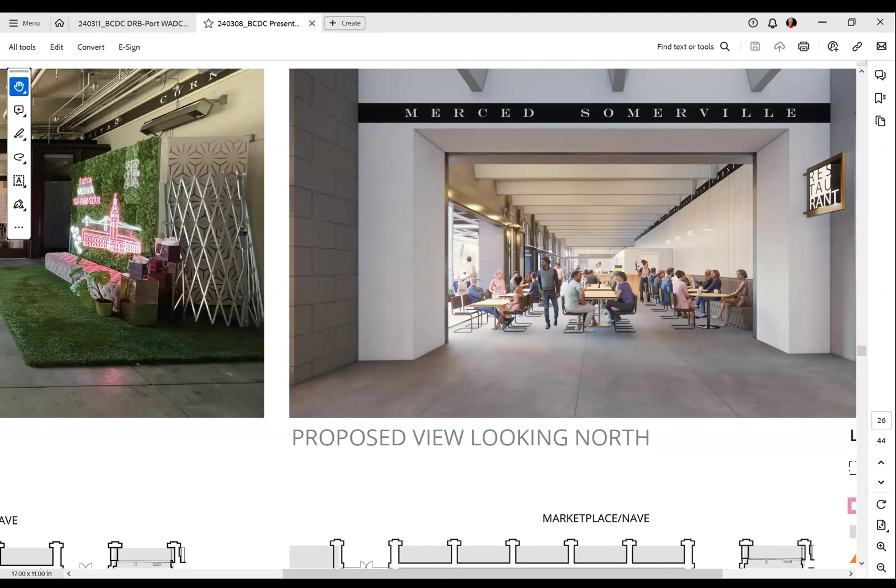I appreciate, Kirsten, how you talked about that, and I do wonder about the length - 115 feet is pretty long. So thinking about how you can downgrade, maybe straighten it out. I do think that aerial view on the front cover does a better job of convincing, but that's not actually a view any of us are going to experience.

I am curious about the datum, what the height set is, and how you can see through the arcades. Thank you, I will look at that.

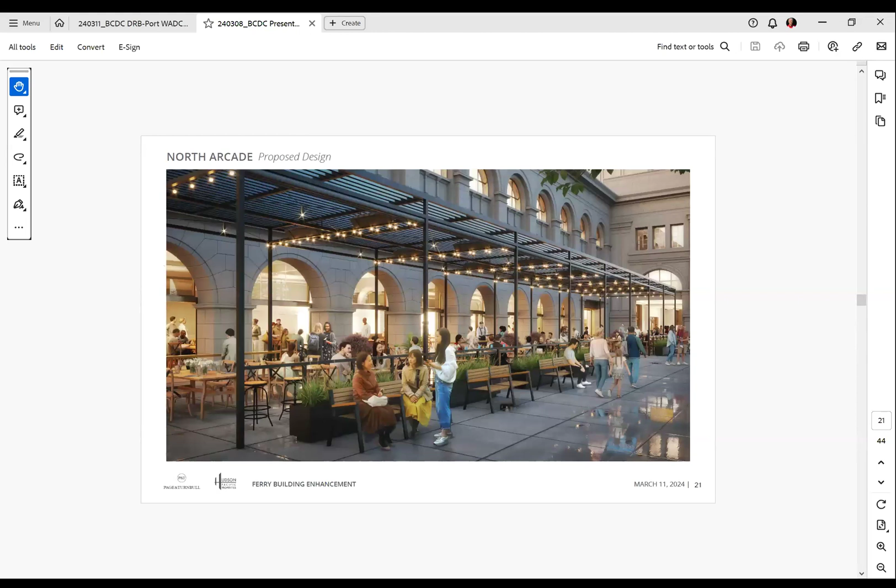So that it's not obscuring from a distance. I do think that is a privatization. Alma, I'm reading that as a controlled perimeter most of the time. I know it's meant to feel airy, but it is a controlled perimeter.

I would like to see emphasis on additional seating in other places, which I think would support - finding a seat over there can sometimes be hard. So I support in general. I think design-wise it could be talked about, so I'm going to give a non-conclusive view on the canopy. My recommendation would be that it could be done, but I'm concerned about the details, the footings, how the perimeter really works in the end, and whether it should be one singular length.

Thank you to everyone. One of the benefits of being last is that all the good ideas have been spoken. I have a lot of empathy for everyone in this room from all perspectives, including Heritage and Telegraph Hill, as well as the applicant and the architect. It's a thorny problem.

I'll keep my comments to the arcades and the canopies. Everyone has had very good comments about the plaza and the south side. I'll note that the 2002 project, which was pretty controversial when they cut the holes in the floor and people were very concerned about that, turned out to be the right move. It was argued about, and people who argue about the Secretary of Interior standards can come to very different conclusions, all in goodwill and good faith.

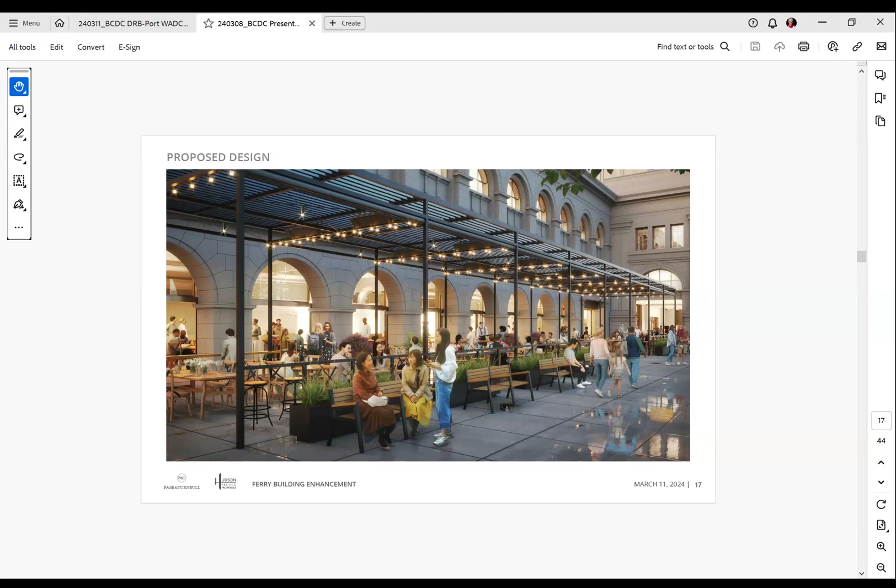So I do support the enclosure of the arcades, and the rendering - if you could go back a couple - shows that view of the restaurant.

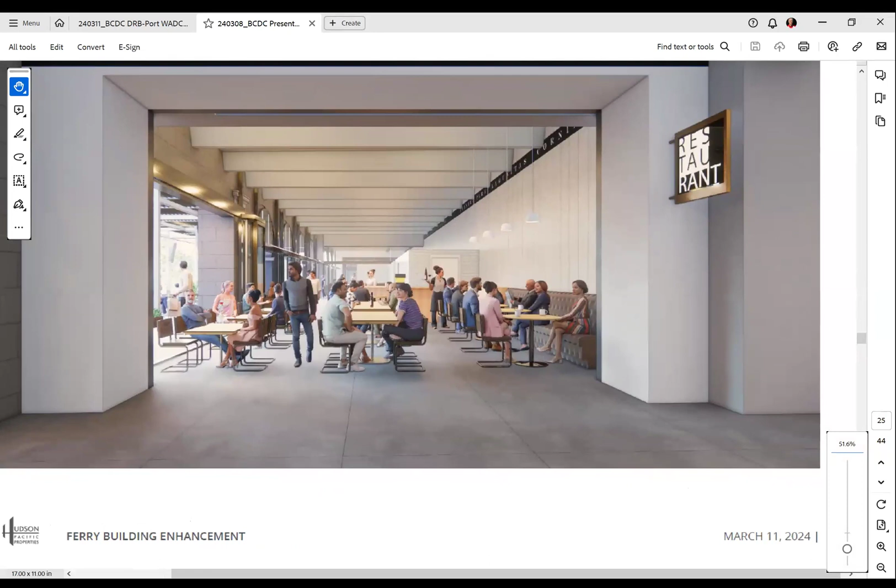This one, side by side, those are a good juxtaposition. I have two minds of this. This to me restores the spatial characteristic of that arcade, and you can kind of see in the background there's a little box that's the back of the house.

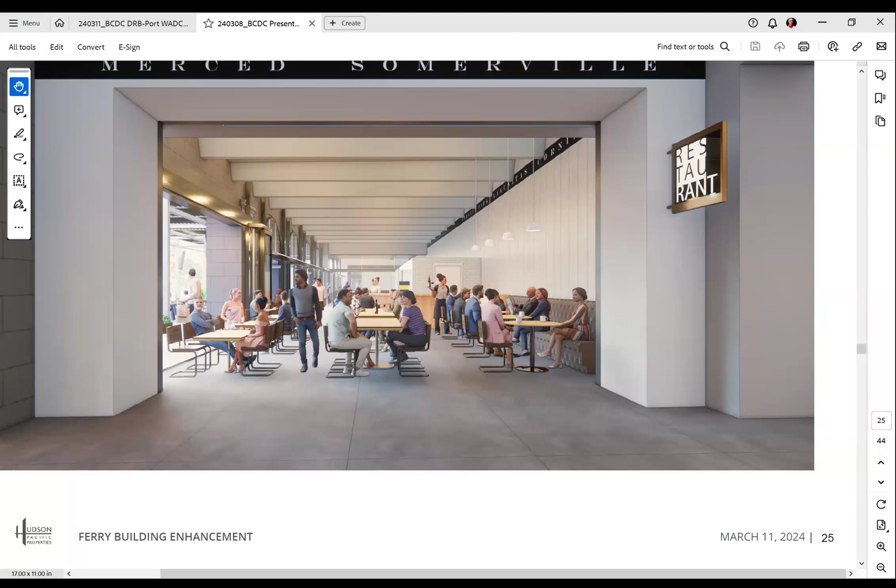I'm very concerned that once you layer in the ductwork for hoods and makeup air and possible space conditioning, and you do a more realistic version of what a back of house in a restaurant looks like, we're going to approach more what we have now with simply a glass wall. So boy, is the devil in the details of these restaurants. I do note that while Gott's is successful, Gott's has about 10 feet on the other side of the wall. And while everyone wants to watch exhibition cooking, nobody wants to watch exhibition dishwashing. So that's really going to make or break this.

As to the privatization of the public realm, I would say we should keep in mind that the Ferry Building as a whole, as a marketplace, is extremely successful in separating people from their money. And while you can walk through there without pulling out your wallet, I think that's kind of not the point. A cafe presents a fairly low barrier to entry — for a $15 beer, you can sit there for 2 hours.

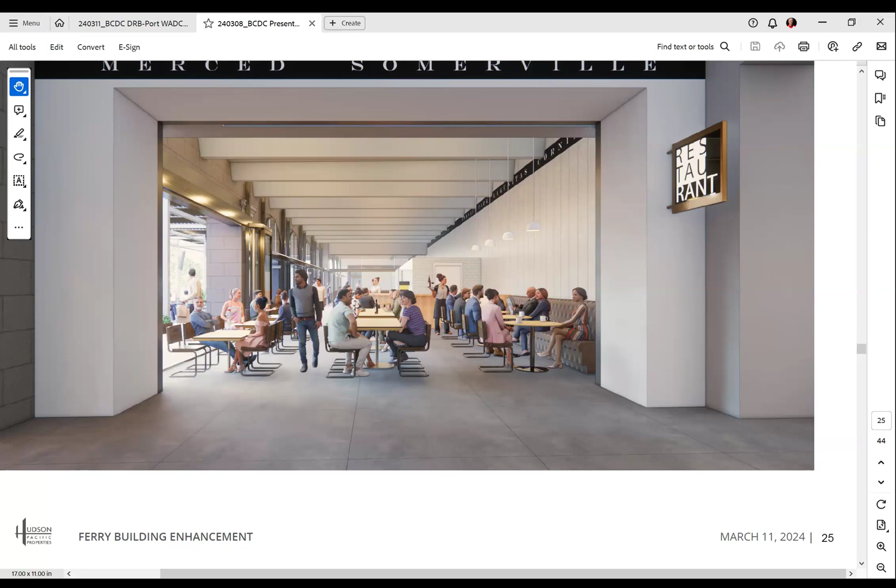So that leaves me with the canopies. I'm of two minds. Half of me would rather see a bunch of clunky market umbrellas and space heaters out there that can roll back at the end of the day. But intellectually, I do believe there's a possibility of a successful design for those canopies.

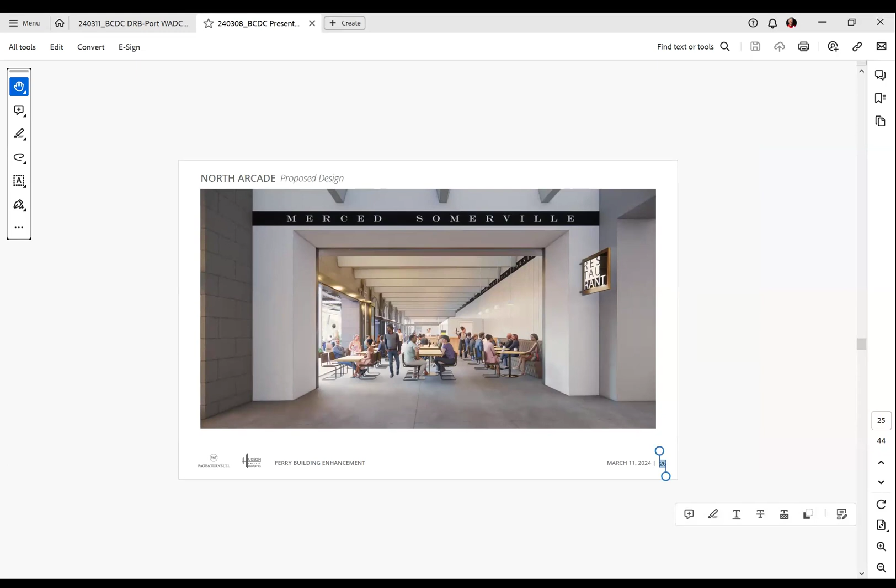I think it has to be very minimal. I think even what's intended now has 2 horizontal bars, and the lower of which seems to intrude on top of the arch. I would love to see a series of perspectives from across the street, from the curb line, every 20 feet, to actually see, without all the beautiful entourage, just showing the stuff, with the heaters hung there — are they clunky, or are they streamlined and integrated? How thin can you get this thing, how elegant can you get this such that it can visually recede?

I think there's the possibility for that. I think there's a lot of design work, and I would have liked to see more detail on that. Going forward to future design review boards, I would recommend the applicant do those studies without the entourage that everybody loves — happy people eating. Do it in a more stripped down way.

One last comment, which is these market lights, which are ubiquitous and are in every parklet and most people's backyards — you can buy them at Home Depot. I think that this as a canopy element, in this minimal approach, would be far more successful with completely concealed sources. So you have pools of light on the dining, but you don't drive by and it looks like those cheap lights.

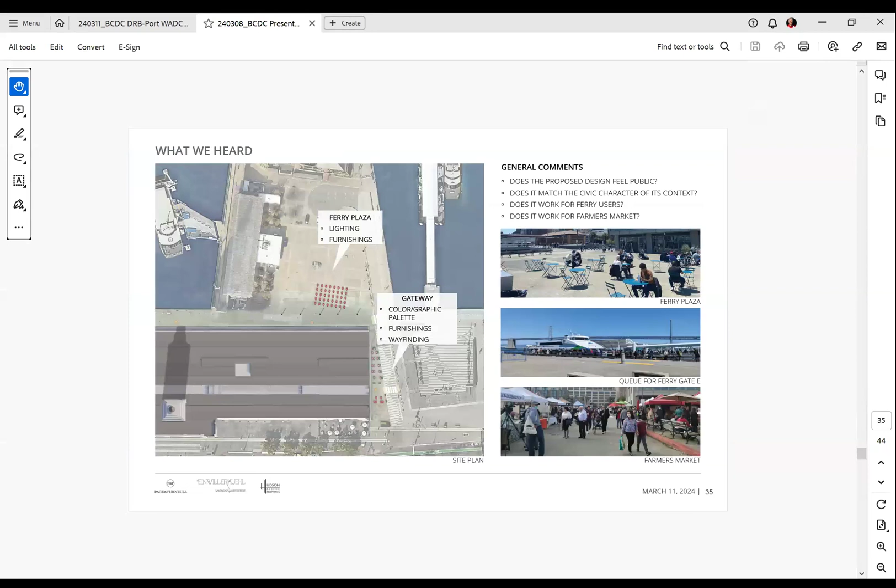Sure. So one of the things we've been discussing with the applicants and with the port has to do with that southern wedge, the circulation around the north side of the drive aisle, where in the proposed cafe market zone they would have some barriers around that seating area, kind of where the cones are right now. We were curious, since it's been a topic of discussion, how that space can be configured. If anybody had an opinion about circulation through that space, that would be great feedback to work with.

Let me respond to that, and anyone else can jump in. It's an important question, and I think everyone actually feels very positive about the activation of that area. This is one of those questions about human behavior in relation to a defined cafe seating zone, when there is still a very large area around it, some of which is defined roadway, with certain times that there might be activity on it, but for the majority of the time pedestrians traverse that without even thinking about whether they're on the roadway versus a defined pedestrian area.

I think the other thing I'd say is this is very much a flex zone from a pedestrian standpoint. The definition of where the pedestrian walks isn't fixed—there seems to be a very big area open to pedestrians, even with the definition of that restaurant area with the planters that are moved back and forth to accommodate the market. So I don't see an issue with that. I appreciate that in the end you've got to define these zones of what's formally pedestrian versus vehicular, or the other side adjacent to the plaza, but I think in this case the benefits accruing from that outdoor seating area mean the pedestrian area can be accommodated in what I'd call that quite large flexible area.

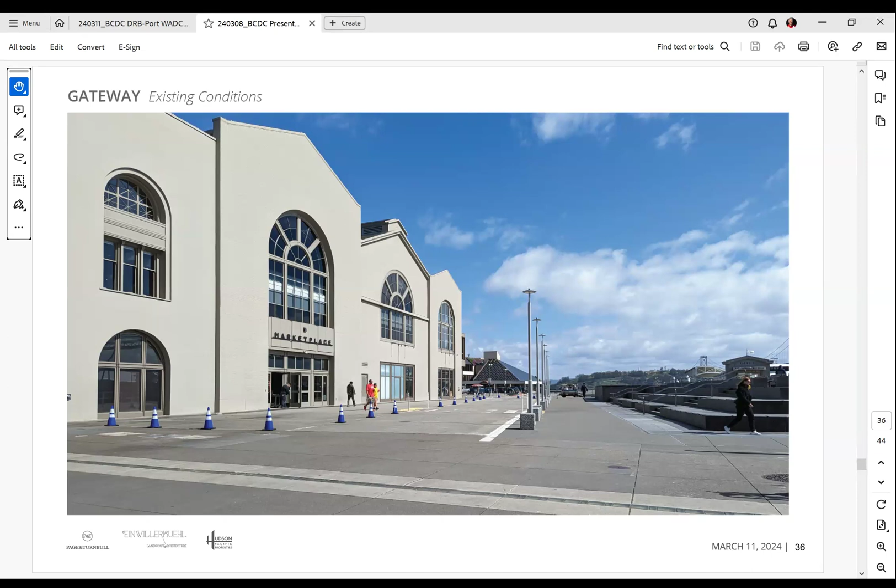So I would look at the wedge through that lens and say maybe the goal is to try to make a space around as much of the building as you can, where it feels really great to walk along the edge. I go for that shy zone where you can actually put people next to the building, have entrances and other things that open up, and transparency instead of the back of a kitchen store. It encourages the kind of pedestrian activity oriented to the building. So I'd be supportive of having that continue around the southern side of the building, and I welcome it.

Does that make sense? I think, Stefan, the specific question was if that was leased to a restaurant, would that be acceptable? I think what I'm hearing you say is yes and no. I think the answer is that having that publicly accessible space around the edge of the building...

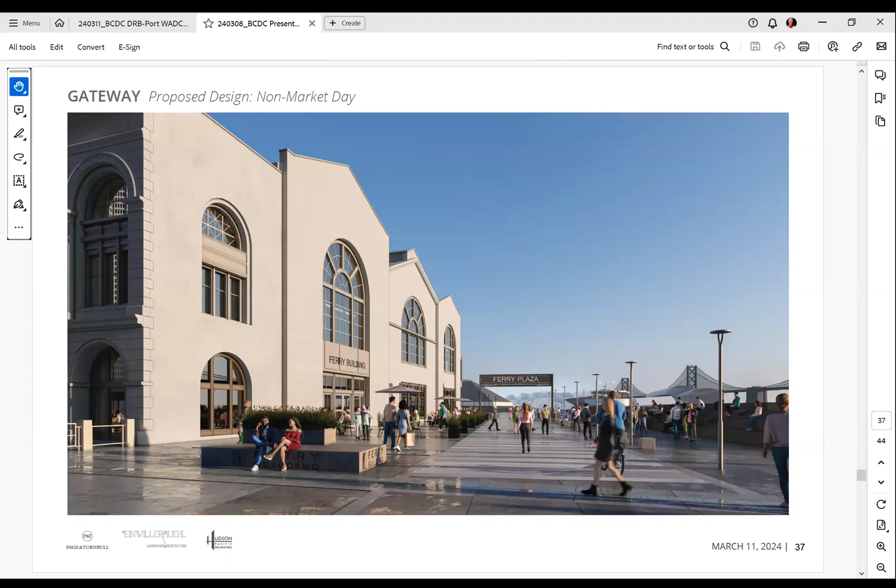Just to be clear, at the south side, in this rendering, where the outdoor seating area with the planter boxes is, not the other outdoor seating areas where everyone can sit. You can see here tables and chairs that everyone can sit at, and further along there's a zone that might be attached to a restaurant that might occupy that corner in the future. This is all might, you know.

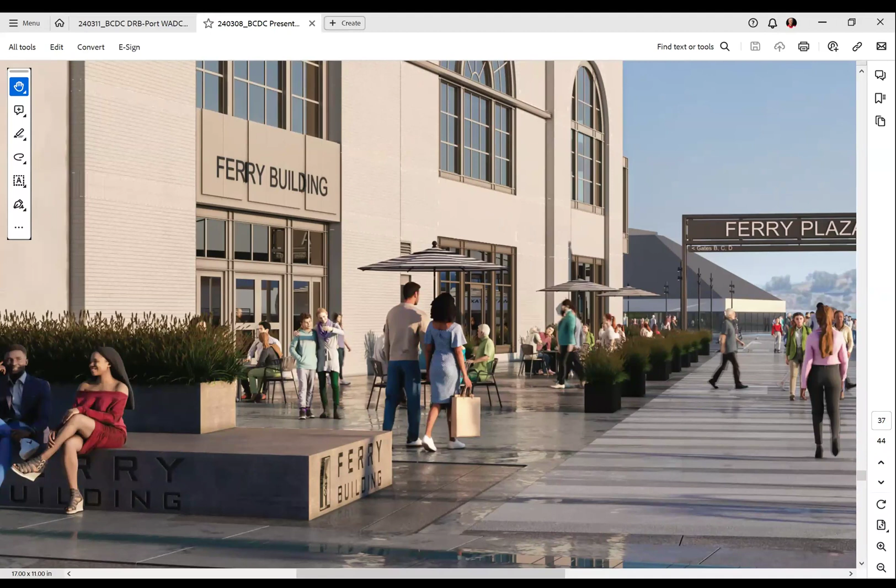But I feel like that's appropriate. The building is big enough and the offerings are, you want variety, and I think it's okay. In there and at the corner, the two zones are getting closer together. So from the pedestrian standpoint, it's not that big of a deal to move around into that central spine. But the idea again is sort of walking around the building. I think it's enhanced through this proposal, but I would see how far we could take that.

May WADC add a comment into this conversation, or do we need to keep these separate? Go ahead. Okay, go ahead.

I just wanted to note, and I'm hopeful the team could work it out, but I'm not clear on how ADA is handled here, and I think that may send you in different directions. If you have to have a strong edging for the whole length of that, then if it's able to be fluid with where the striping is, I'm completely in agreement. But if you've got an edging that needs to be more controlled than what we're seeing, and it's forcing everyone to crosswalk over and back, that would be my question, attention to that, how that is reconciled. Alma.

I was actually just going to react to the question. So the question was, is it appropriate to have a more private zone or less public, let's say. From the point of view where we were arguing earlier about whether the Ferry Plaza sign was useful or necessary, or whichever way it's done.

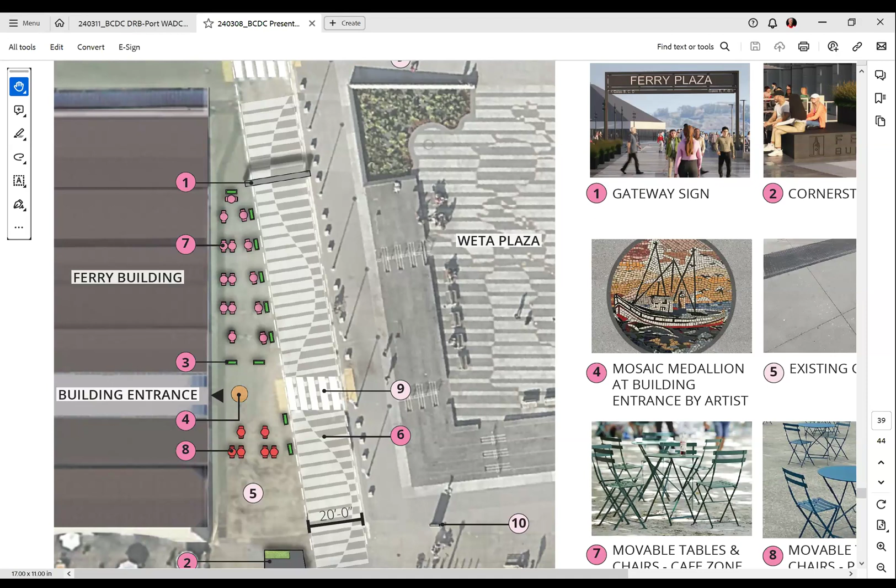Okay, so I'm just going to briefly summarize where we're at after the dialogue, before we ask for the proponent's response. I think I'm just going to look to the areas of consensus. So if we want to check off the plaza, I think everyone feels very positive about enhancing that through additional lighting and the approach that's been taken.

So consensus on that item. On the South Plaza, the wedge, I think there is consensus. Again, all of this is in the context of devil's in the detail, and take on board the comments made in relation to design, ADA, and the other things that have been talked about.

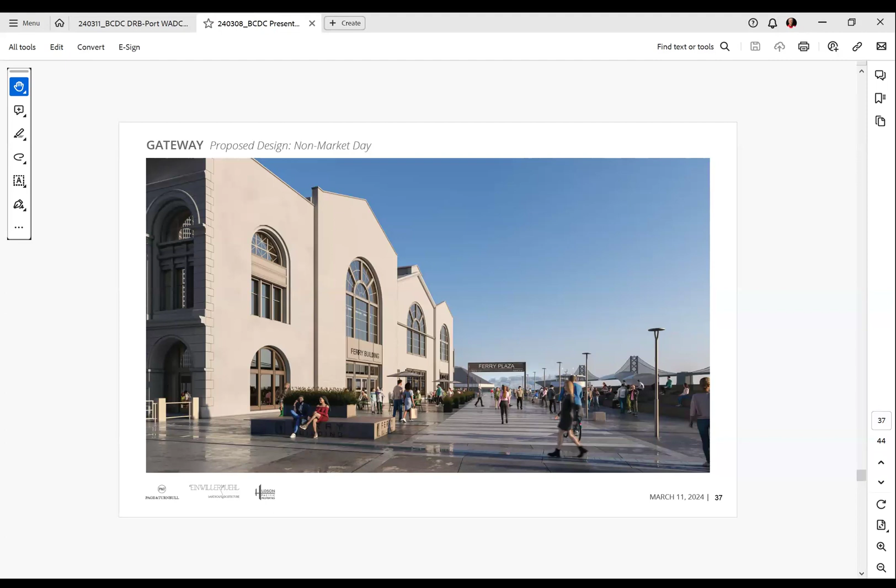The South Arcade, I think everybody supports our market operator. Otherwise, I think we're really very committed and want to see you there long term. We want to see the kitchen there long term. It is not clear, because we didn't see any proposed details, and we understand why from Hudson Pacific, that this is not on the front burner yet.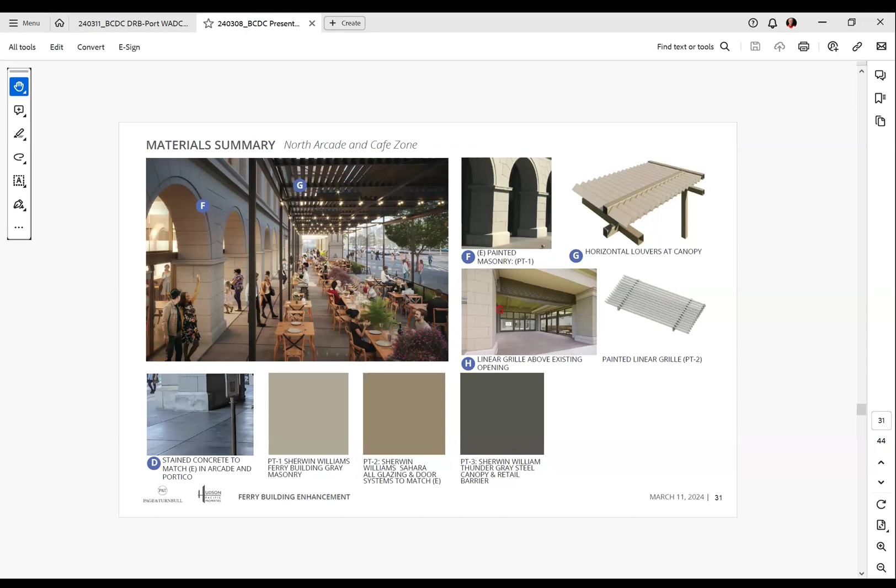And I want to pick up on something Alma mentioned earlier too—that if this is some years down the track, it gives a good amount of time to observe the experimentation on the north, the success of the North Arcade, and fine-tune the South Arcade down the track. So I would say we can't offer consensus on the South Arcade because in a way it's not being presented in detail to us tonight. So I would put that aside and just say we don't need to really resolve that tonight.

On the North Arcade, I think there is general consensus that enhanced lighting is good. Activation, drawing people into the building especially at night, letting us know it's a great place to be, is very important. I think there's general consensus that having restaurants and operations that activate the North Arcade is a positive. But, very big brackets after that—the devil is in the detail, the operational complications and challenges, the public movement through these areas, the perception of publicness.

Outstanding questions. And then, of course, the third point I wrote down that I think there's general consensus on is that cleaning up what's there at the moment, which is really very modest and not very attractive, is a very positive thing and can only enhance everyone's experience of the ferry building.

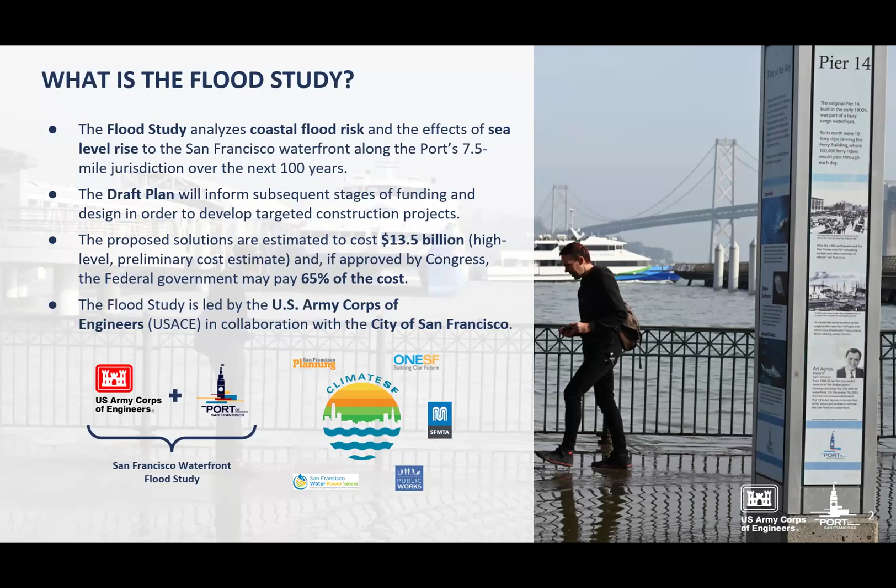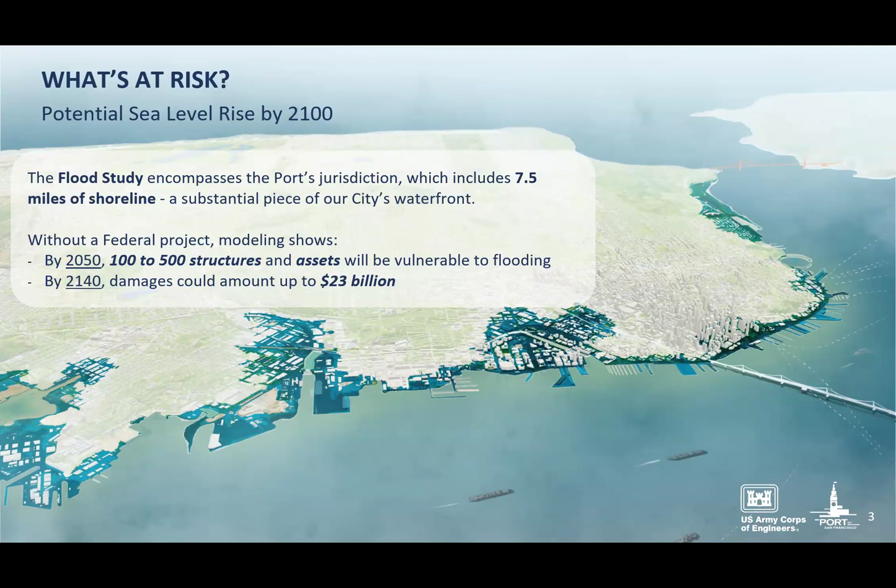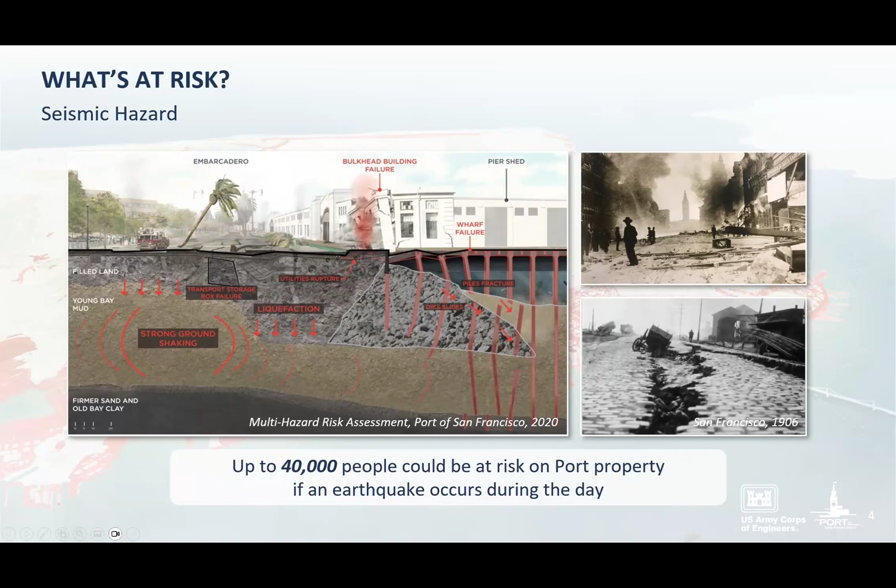We are in a 60-day public comment period that is part of the NEPA process, reaching out to the public, doing a lot of community engagement, workshops, walking tours, and trying to get feedback from the public. The idea is that once we have additional public feedback, we continue working with the Army Corps of Engineers.

They are doing further feasibility analysis, and we're also working with all the city agencies to get further comments. The idea is to come up with a final plan by the end of next year, 2025, and seek congressional approval by 2026.

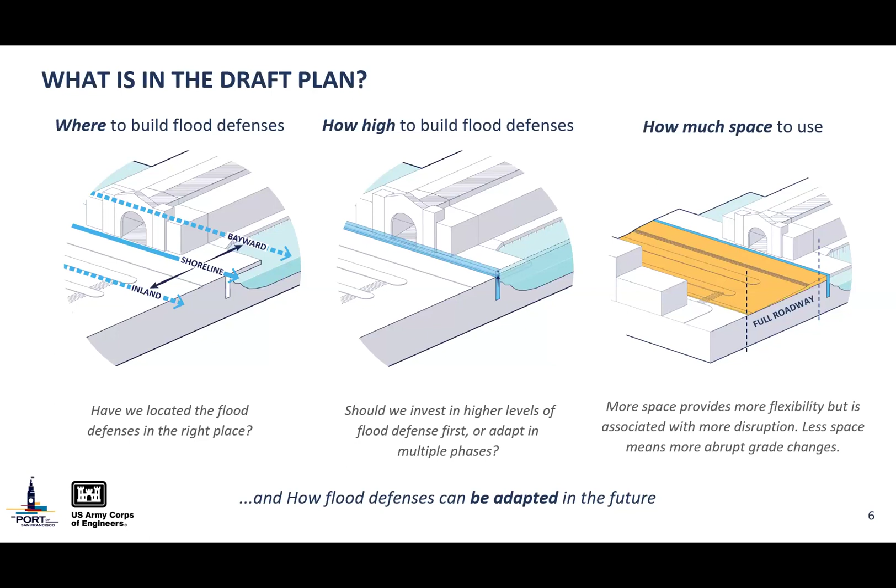What is not being decided at this stage: we are not deciding the detailed design for the flood defenses. We're also not designing the waterfront streets, open spaces, or all the infrastructure. This is a very high level plan looking at the location of those shoreline defenses. We also won't have the timing and sequence of construction yet, since we don't have those detailed designs. Also, the plan does not include a funding plan.

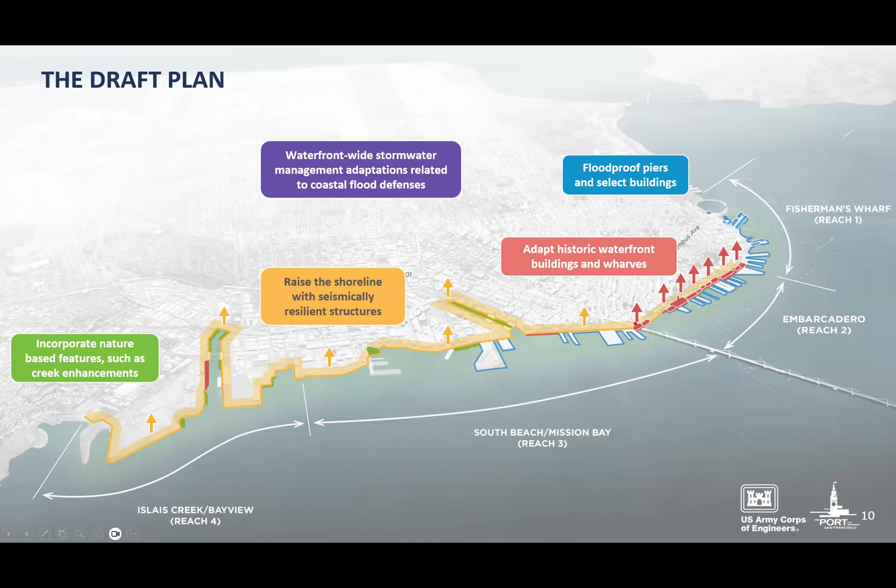Some of the subsequent actions identified here include elevating the shoreline, the wharves, and the historic buildings with some seismic improvements, and of course defending the utility and transportation networks.

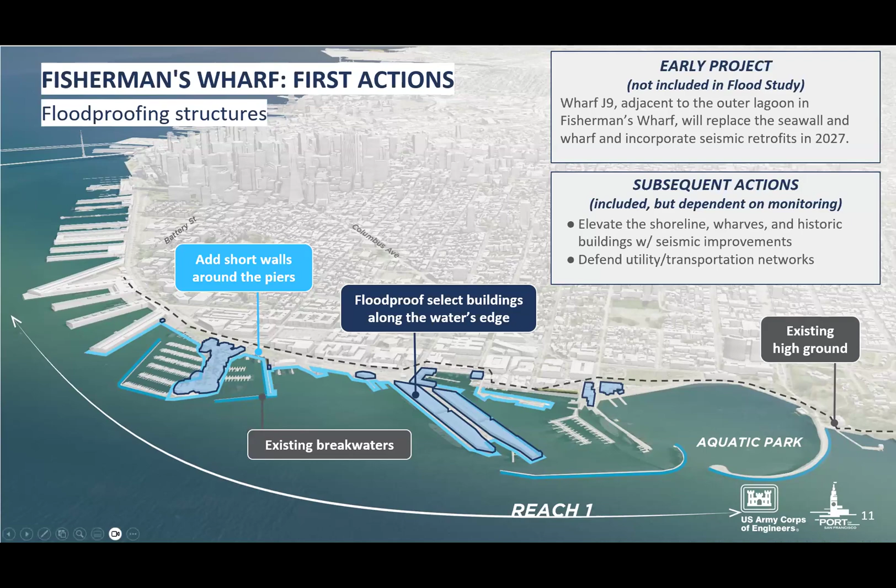This graphic shows what we mean by flood-proofing some of those select buildings. Flood-proofing can happen in several ways: sealing some of those openings at the lower levels, windows and doors, and also elevating some of the transformers or more critical infrastructure of the building. But one of the things the plan proposes is to add short walls around the piers, to protect against wave action and gain some time, extending the lifespan of those piers.

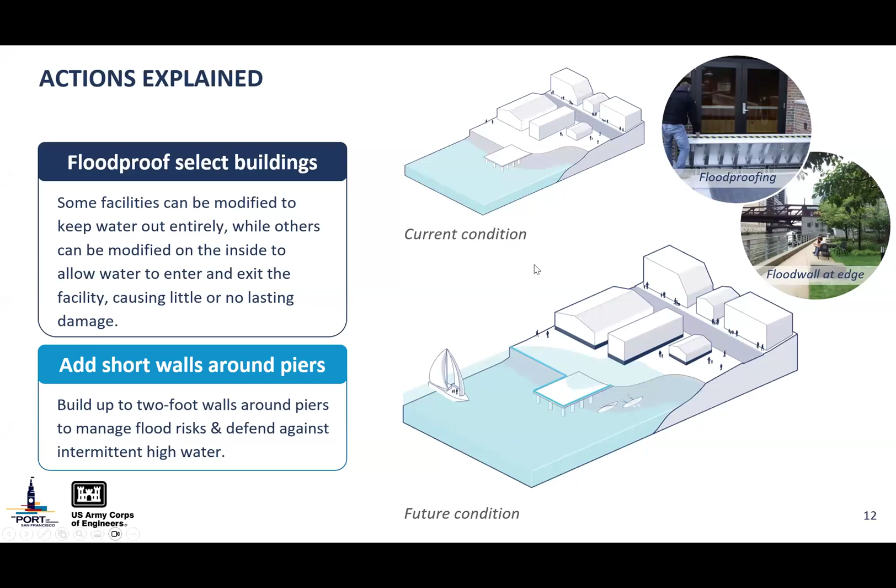For the Embarcadero area, the plan identified a lot of critical city infrastructure, and it's an area with some of the lower elevations along the line, making it more at risk. So the plan proposes to elevate and defend against 3.5 feet of sea level rise all in one step, in the first action, to minimize disruption due to construction. In this area, we also identified some of the buildings along the wharves, some of the bulkheads of the buildings, and some of the historical infrastructure, including the Ferry Building. I have a graphic that shows in more detail how that could work.

In this area, we're also adding short walls around the piers. The piers themselves will stay at their existing height; they will just receive those short walls to extend their lifespan. So in this area, the plan hasn't identified any subsequent action, since the first action here is already elevating to defend against 3.5 feet of sea level rise.

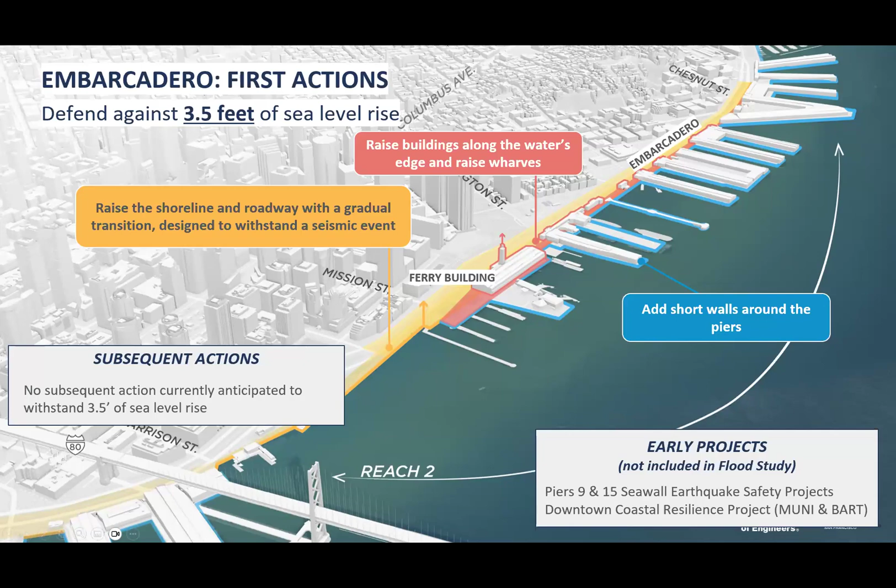This graphic shows how we would elevate some of those wharves and bulkheads of the buildings. The red color shows the areas being elevated. The piers themselves will stay at the existing height and receive short walls around them, so we'll create some transitional space between the bulkheads of the buildings and the piers. Looking back toward the city, we will create that transitional space — there could be a terrace or a gradual transition in the grading to meet the existing city grade, and that is the area that will receive the seismic retrofit.

In South Beach and Mission Bay Reach, this is the third reach — an area the plan identified as having, in general, a little more space. So the plan proposes a more incremental approach: elevating the shoreline to defend against 1.5 feet of sea level rise, which can be adapted in the future. You see here in orange the areas proposed for elevating the shoreline with some ground improvements.

The plan also identified areas where we could apply nature-based solutions. You see the green areas marked here, towards the south and also along the shorelines of the creek. For the bridges in this area, the Mission Creek bridges will remain at existing height for these first actions, and they will receive deployable closure structures that will be deployed during storm events.

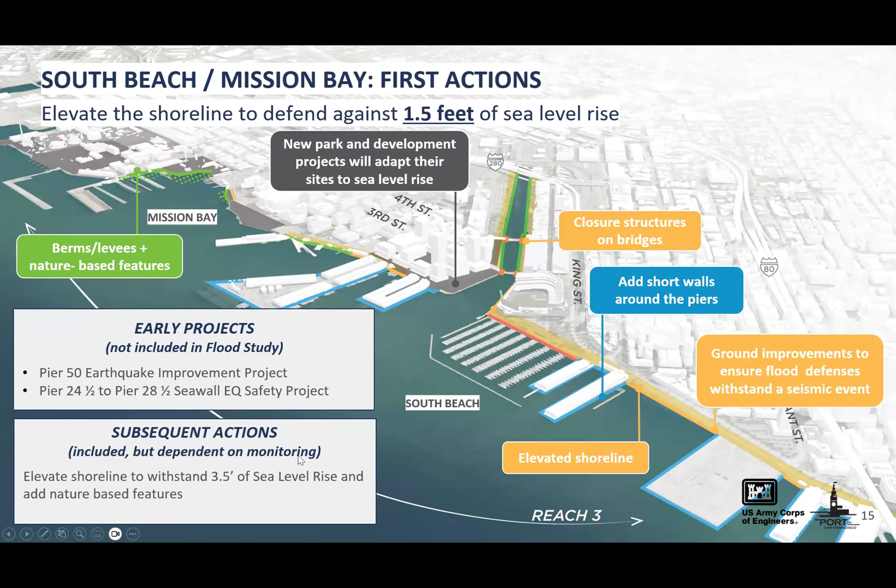Oh sorry, I forgot to mention one thing here in Mission Bay. Some of the subsequent actions we identified are to elevate the shoreline to withstand 3.5 feet of sea level rise, and potentially add more nature-based solutions.

This is the last reach that we have, the Islais Creek Bayview area. This is also an area we've identified that has a little bit more space, so we're proposing an incremental approach to elevate the shoreline to defend against 1.5 feet of sea level rise. You see the areas in orange that we're proposing to elevate. The piers around Pier 80 and Pier 96 also received short walls and seismic retrofits.

Along the creek, we are proposing some nature-based solutions, particularly west of the 3rd Street Bridge, and also closer to the mouth of the creek, and along Warm Water Cove Park. The southern edge of the creek here in red, we are proposing to raise those wharfs to continue the operations that the port has over there.

The 3rd Street Bridge is not part of this plan because Public Works is already working on elevating that bridge. But the Illinois Street Bridge will receive deployable temporary closure structures, similar to the ones being proposed at Mission Creek.

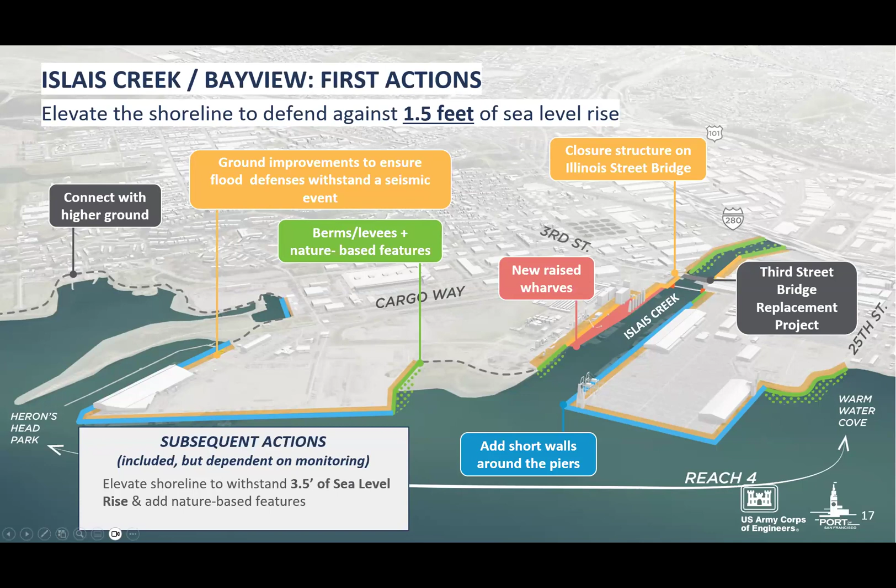This is showing how some of those nature-based solutions can be applied. The idea is that those elevated shorelines with natural berms can be part of the open space systems, so they can include trails, bike paths, promenades, in order to also provide more community benefits to the neighborhoods.

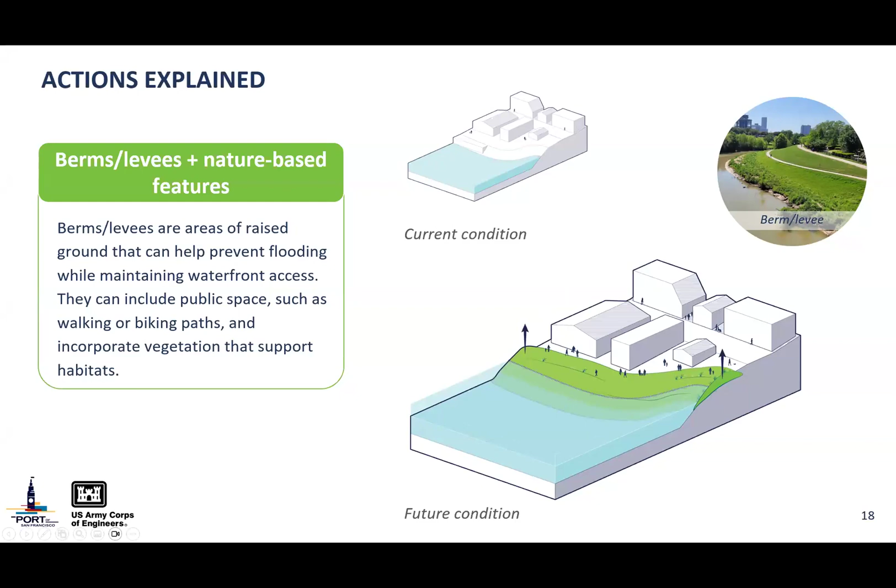So just to finalize, the way we are looking at it is that this is a once-in-a-century opportunity to defend the communities and the assets, including some of that vital city infrastructure. While we can address some of those seismic risks and improve earthquake safety, we can also see this as an opportunity to secure funding with collaboration with the federal government and invest in a great public waterfront where we can add nature-based solutions and adapt historic resources to climate change.

As I mentioned, this is the last slide. We are in the public comment period, so we've done a lot of public outreach. Last week and the week before, we had 4 public workshops. We also offer walking tours, trying to make it as easy as possible for the public to comment. We've updated our website, adding a lot of information including story maps. There's also a longer deck than this that people can watch at their own time.

We have been reaching out to all the different CBOs and also going to bodies of decision makers in the city, such as this one. We've gone to the Historic Preservation Commission, we're going to the Planning Commission this week, and we're going to the MTA board, the board of supervisors, and I believe also the PUC board. We're trying to cover as much as possible in this very short time and get feedback from the community. So with that, I'm open for questions, and thank you very much.